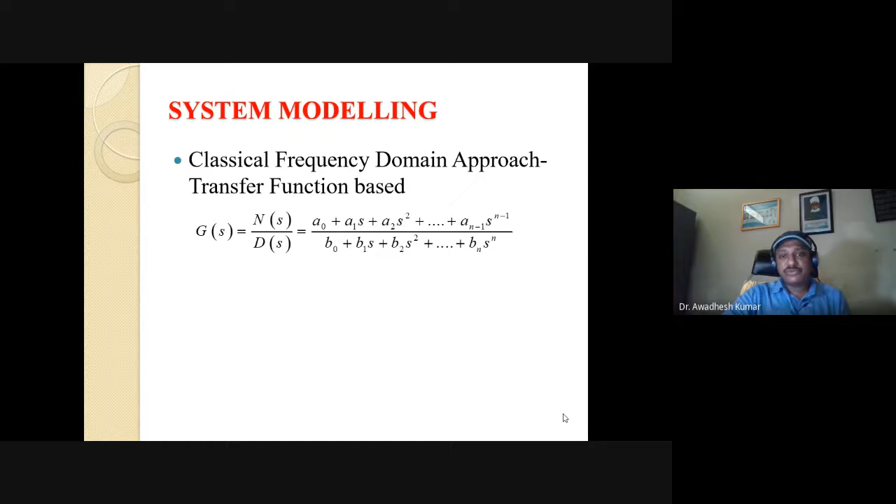So often the two representations we see: one is the classical presentation via transfer function approach, where the transfer function is nothing but the ratio of two polynomials of S. And if we define this transfer function, it is always for the relaxed system, and in S domain, this is the Laplace transform of output to input.

While in time domain, we go for the state space modeling, where what we do is, if we have an nth order differential equation with us...

So what we can do is we can break this nth order differential equation into n first order differential equations and put all those differential equations into some matrix form, leading to x dot equals Ax plus Bu, and y equals Cx plus Du. This is well known to all of you, I hope. So these four matrices A, B, C, and D now represent our system, where the first equation is called the state equation, and the second one, y of t equals Cx plus Du, is called the output equation.

So in both representations, there are some limitations and some advantages. In the transfer function approach, suppose you go for a very high order system. In the denominator, this n will be very large. Let's say if n is 100, then in the denominator you will have 101 terms, and if this figure goes beyond 100, it's difficult to even write, and the analysis becomes cumbersome in the frequency domain. While in the time domain, with matrices A, B, C, and D, this matrix A will be, in case of 100th order, a 100 by 100 matrix, and most of the elements of this matrix would be 0. So only the storage of non-zero elements is your concern, which is a convenient way to represent the high order system.

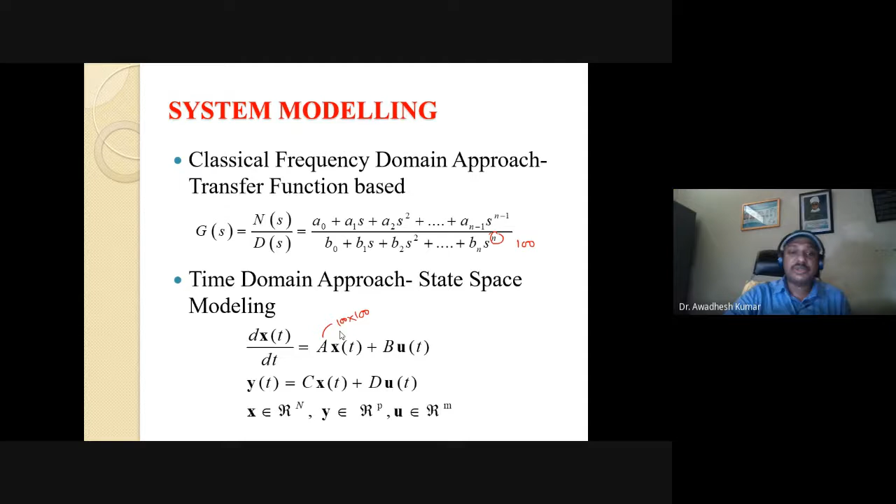And further, being represented via this time domain, mainly I have worked on this time domain. The frequency domain things are also very simple, but researchers have worked on the algorithm itself, and these cannot handle large scale systems. So it is always better, for large scale systems, to be in the time domain approach.

So now these slides will elaborate further on why we need approximation of the system, when it's represented with complexity, let's say as a high order system. With the system, what we want first is the analysis and synthesis of it. This will be difficult somewhat, and better understanding of the physical system will be difficult if you have a complex and high order system. So that forces us to go for a simplified version of the original system.

If we have the simplified version, it will have less simulation time. There will be reduced complexity, reduced hardware complexity, and it will lead to simplified controller design. This will be elaborated again in the future slides, and all this will lead to cost-effective solutions.

So now coming to the motivation. One thing, Dr. Chiranjeevi. Sir. Yeah, actually unfortunately we don't have power right now, so I'm sitting without a fan. Anyway, the internet is fine with us, and we have a backup also. Otherwise, we'll use some data if anything goes wrong. Yes sir, I will inform you. So yes sir, okay.

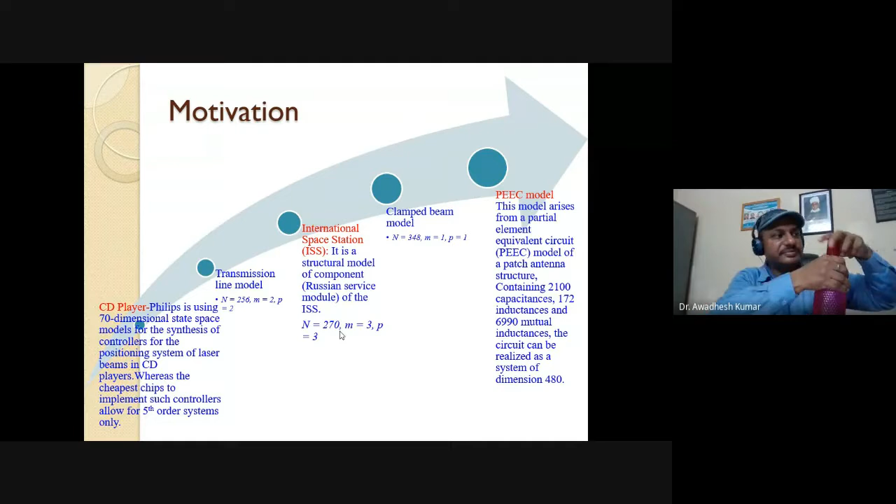Right, so now we can see several examples of the transmission line model. This happens to be of 256th order. Then the International Space Station, that is 270th order. Clamped beam model, PEEC model - this PEEC model contains around 2,100 capacitances, 172 inductances, and around 7,000 mutual inductances, so on. I hope we are familiar with the order of the system.

So once we have the energy storage elements, these give rise to the order. Suppose we have 2 inductances and 2 capacitors - if we try to model this, we'll have a 4th order system. So the number of capacitances and inductances leads to a high order system, right?

And of course, if there are several capacitances, we can put these into some equivalent capacitance, so that would simplify the order - we'll have less order with the simplification of the equivalent representation. But often in a complicated circuit, it is not possible to present the equivalent of all the capacitances and all the inductances. Otherwise, all circuits would reduce to 2nd order only, because in electrical engineering we have only 2 energy storage elements.

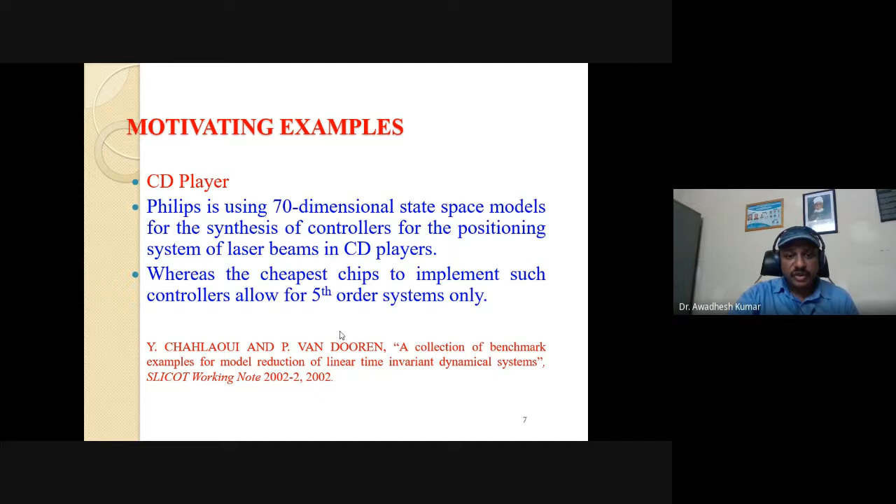So this forces us to look for some simplified version of the model. This is another Russian service module - when it is presented into the state space model, it happens to be 270th order with 3 inputs and 3 output systems. Then another one is the PEEC model.

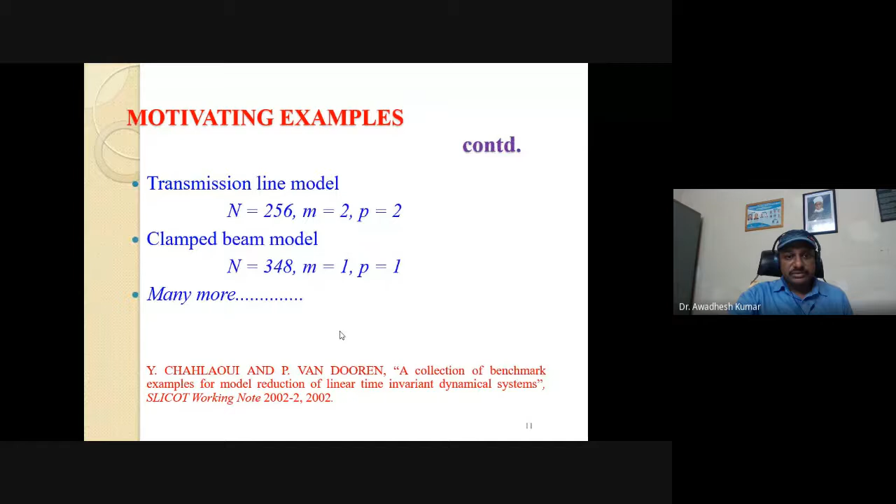Now let us define what it is. The aim of model reduction is to replace a given mathematical model of a system or process by a model that is much smaller than the original system, but still describes at least approximately certain aspects of the system or process. So we want to represent a system by its simplified representation, and that simplified representation should still possess at least the most important features of the original system.

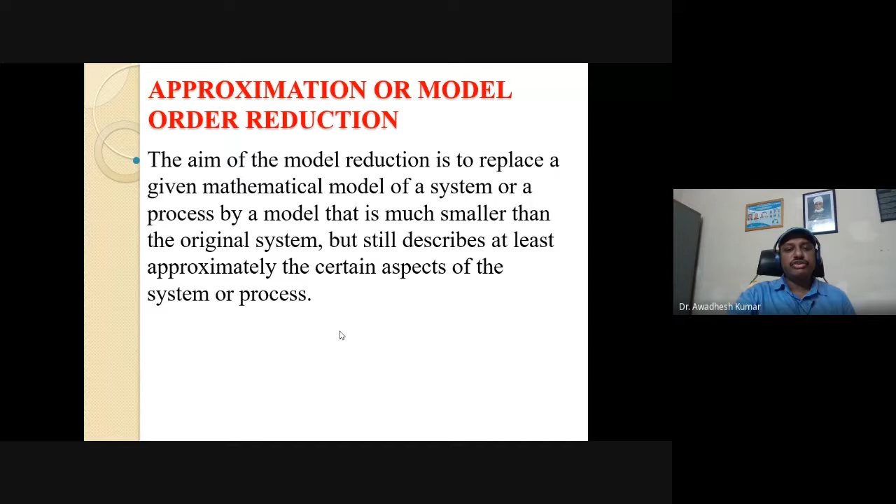Now, in order to do that, what are the constraints, what are the points that should always be taken care of? This approximation error means: the simplified version and the original system, if given the same kind of input, then the response obtained via these two - the original system and the approximation - we call that difference the error, and this error should be as small as possible. This error is measured via several other notions.

And if the original model taken is a stable one, the reduced model or approximation should also be stable, so that stability is preserved. Even if the original model is unstable, the simplified model should also be unstable. Most of the time we are concerned with the stable original system, so the stability should be preserved while presenting a simplified version of the original system.

Passivity is another notion - this should also be preserved. In some large interconnected systems, even though the original model is passive, after simplification it is able to possess some kind of energy, so the model does not remain passive. So we have to take care of passivity as well. And whatever mathematical steps we prepare for presenting the model, they should not pose a mathematical burden to the computations, right?

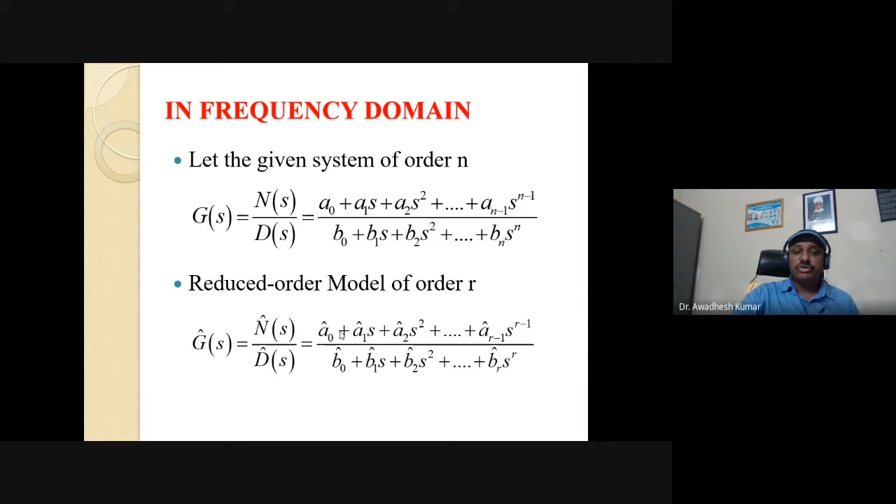Of course, we have discussed the limitation in the frequency domain. So mostly we deal with the time domain. In time domain, what we have is the presentation by some matrices A, B, and C, where N is supposed to be very, very large. So the system matrix A is of size N cross N.

If I present the system as a black box denoting with x of t, the output, input, and states all become important. Representing this by x of t, given the input u of t, it gives the output y of t. Now I'm going to present a smaller version of this system.

So we can have another system z of t, which is the simplified version of x of t. If I'm giving the same input u of t, I must expect the same output y of t from this simplified representation, but it will not always be there. If it is some y dash differing from the original, then the difference between y of t and y dash of t should be as small as possible.

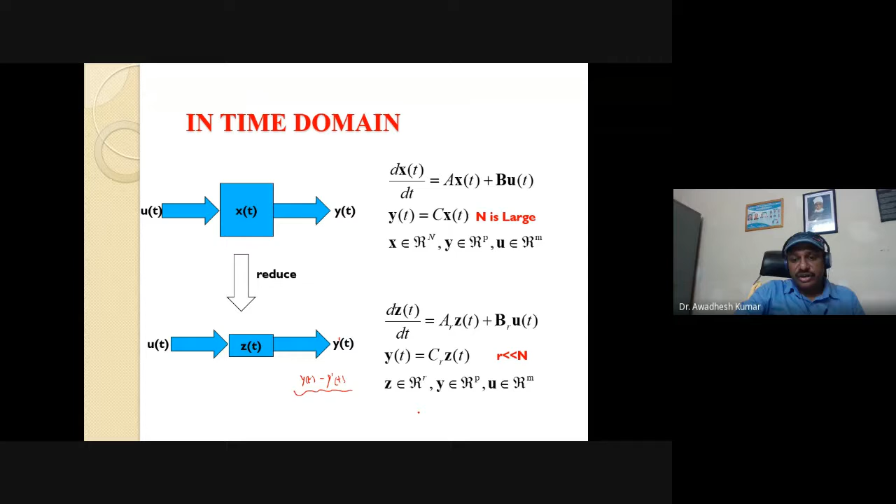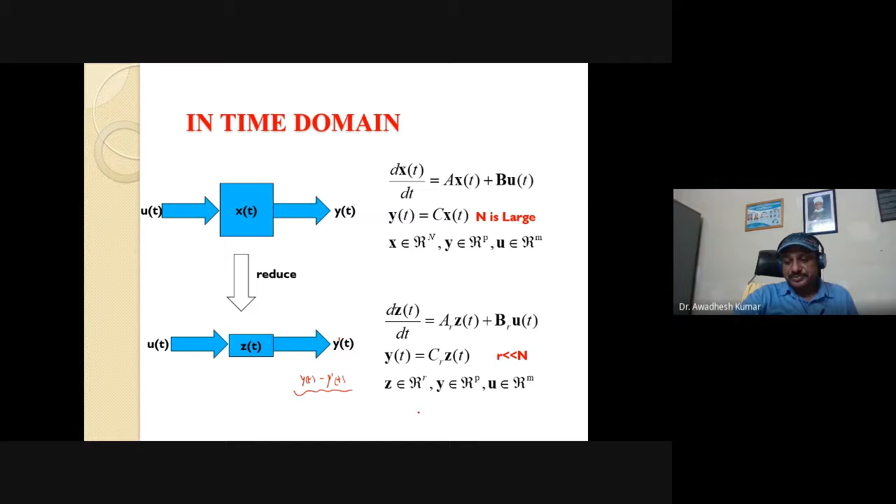So we will have another set of presentation: z dot equals Ar z plus Br u, and y of t equals Cr z. So instead of A, B, C matrices, now we have Ar, Br, and Cr, where this Ar system matrix is of order R cross R, and R is much lesser than N. So this is the statement or objective of the reduction in time domain.

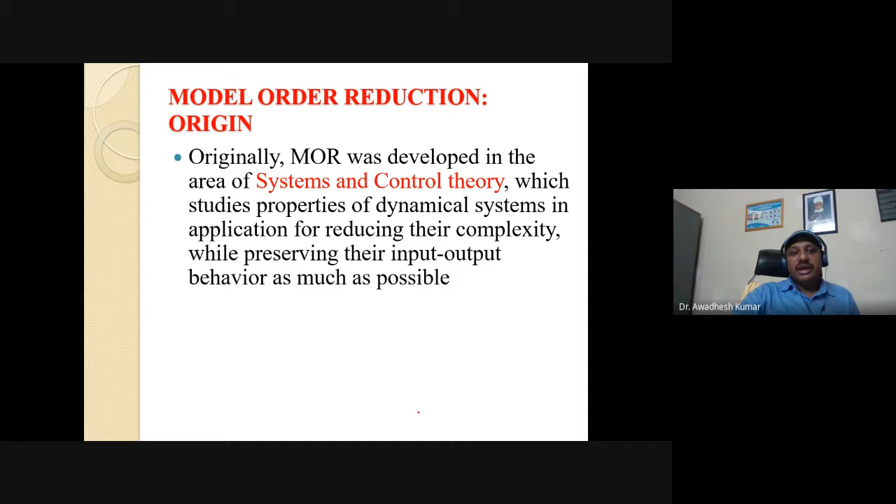So let us come to some historical notion about this area. Originally this was developed in systems and control theory, and still it is thought to be, in fact, the system and control papers are dominating, still dominating. So originally it was developed in the system and control area, but soon it was taken up by numerical mathematicians, especially after a very prominent work as the Padé via Lanczos.

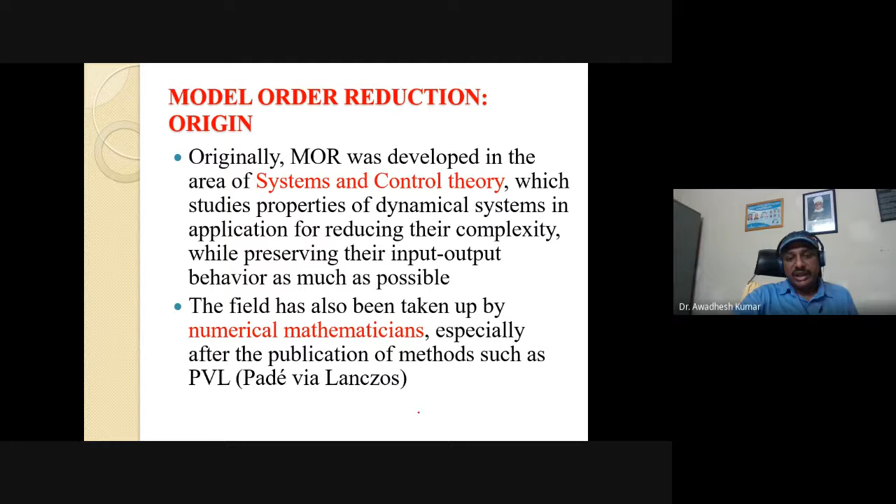And now it is, in fact, a flourishing field of research in both these areas: system and control theory, as well as numerical analysis. But most of the prominent work has been done by the system and control people.

This idea is not new, but it all started in 1807 when Fourier translated the idea to approximate a function with few trigonometric terms. We often have encountered this Fourier series and all.

In linear algebra, the first work via Lanczos was realized, where he represented a matrix in tridiagonal form. Again, W.A. Arnoldi realized that a smaller matrix could be a good approximation of the original matrix. In time domain, this is a play of matrices only.

So the fundamental methods were actually published in the 80s and 90s of the last century, and then this area started taking a boom. In '81, a very prominent work by B.C. Moore was proposed, known as balance truncation. And one more important technique came out in '84 by K. Glover, this optimal Hankel-Norm approximation.

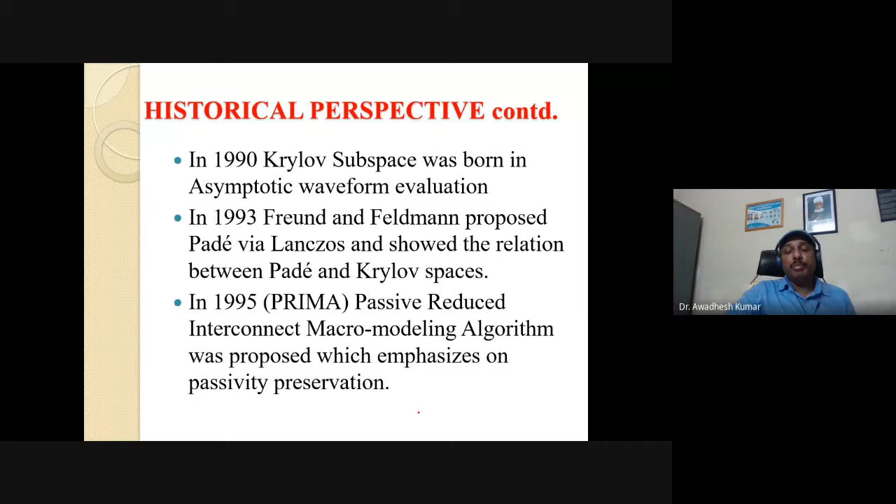So these are a few of the prominent works as a historical perspective I have taken. Still, there are many landmark things. But these, in fact, were the basic things - you can take it as the beginning of this particular area.

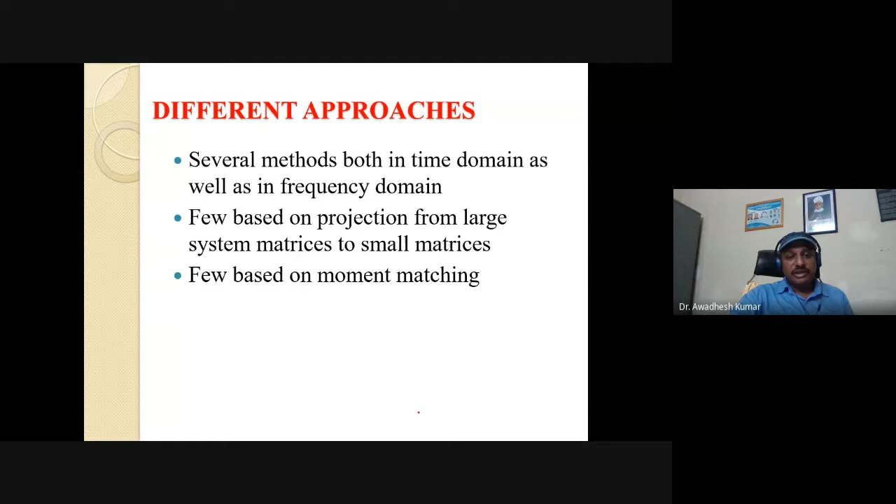Now, having seen this perspective, let us jump to the different approaches. Several methods, both in time and frequency domain, are found in literature. Some are based on projections, and some are derived through moment matching.

In time domain, the prominent methods we could see are: Krylov subspace projection, balance truncation, and Hankel-Norm approximation. I'll try to cover a little bit on Krylov, I'll more focus on balance truncation, and give you a glimpse of Hankel-Norm also, but we'll focus more on balance truncation and a little bit on Krylov subspace.

There are several frequency domain methods based on dominant pole retention, pole clustering, Pade approximation, Routh-Pade approximations, methods based on ISE minimization, applying conventional and evolutionary techniques. The basic formulation is the same, but once you apply different optimization or evolutionary techniques, this gives rise to another method. And by mixing two methods, you can propose some new method. So there are several variants to these methods.

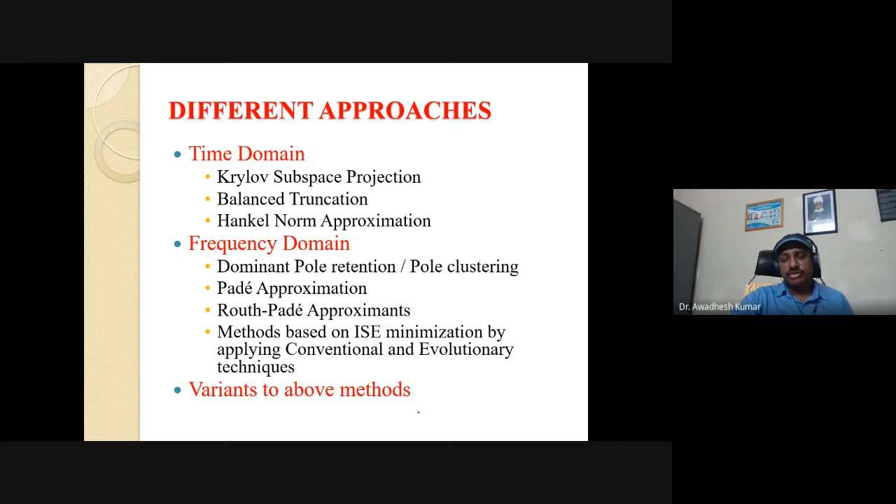We'll not discuss in detail, but if time permits, we'll discuss a little bit on the Pade approximation as the basic approach, so that we can convey the basic philosophy of this particular research area.

Now, before we enter into the approaches, let me discuss a few terminologies so that it will be easy to understand those things. The first terminology is singular value decomposition, SVD. The second is factorization of matrix, Cholesky factorization. Then the projection framework. I would like to discuss these three terminologies one by one so that we can enter our topic. So first is singular value decomposition.

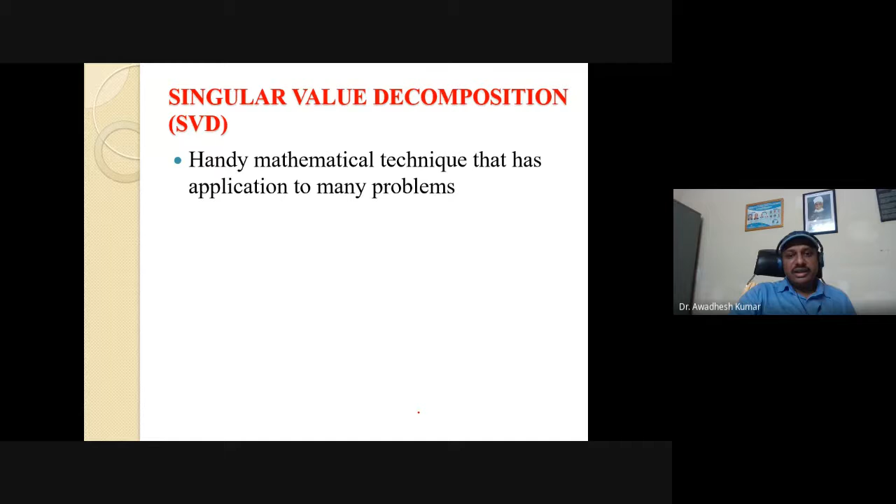It is a very handy mathematical technique that has applications to many problems.

The matrix A can be factorized into three matrices U, W, and V, such that U, W, V transpose is equal to the matrix A itself, where A is of order m cross n, U matrix we can take as m cross n, the V matrix is n cross n, and the middle one, the W matrix, is the most important, of order n cross n, and it is a diagonal matrix as well.

The most important feature of this matrix is that it has only the diagonal elements as some positive values that we call singular values. Let us represent this via W1, W2, up to Wn. So if it is an nth order system, we'll have n Ws, and via MATLAB you can easily calculate this SVD using the command [U,W,V] = svd of system matrix A.

If you define this W, we call it the Hankel singular values. They are just the square root of the product of controllability and observability gramians. What are the gramians? We'll see later on. One more thing, we can relate these singular values as the square root of eigenvalues, and eigenvalues again are nothing but the most important characteristic feature of the system.

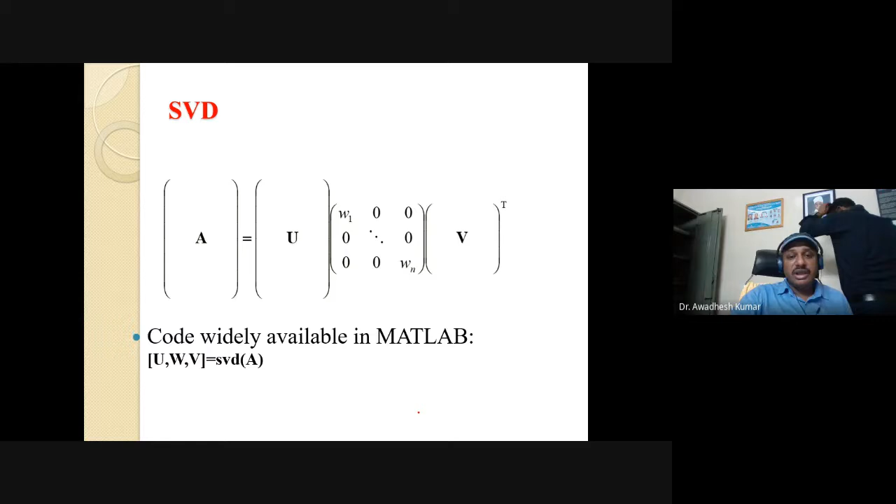So in order to have the algorithmic development of these processes, we often need to use this singular value decomposition, where the matrix A is factored into three matrices U, W, and V.

One more thing, we can find out the rank of the matrix by observing the number of non-zero Hankel singular values. What happens in the system when we calculate these singular values, we may observe some of these Wi may be 0, and that is because the system matrix A is not a full order matrix. So then it will be 0.

So corresponding to those zero singular values, those states can just be left, those can be truncated directly without harming the system, and the system order will automatically be decreased to some lower order.

Let's say if the rank of A is less than capital N, and it is some K value, so the order will be K. But still, we are interested to lower the dimension of that matrix to somewhat lower value, let's say R, with R being much lesser than K also. So what we do is we try to sort out those singular values which are important to us, and how they are important, the coming slide will discuss.

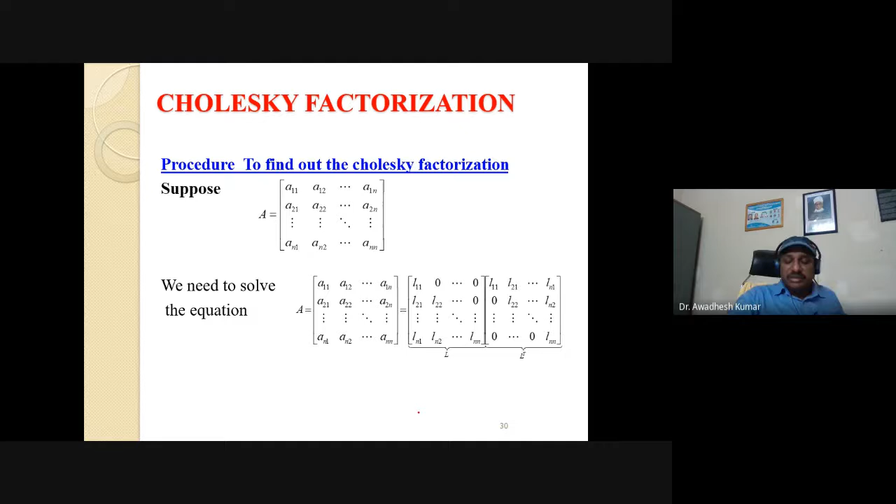So just applying the principle of equation, you can solve this. Here is some general formula or equation given to you, by which we can find the elements of the L matrix.

So this just gives you how we go for this Cholesky factorization. Once you obtain this L matrix, these are the things that you are going to use in your algorithm.

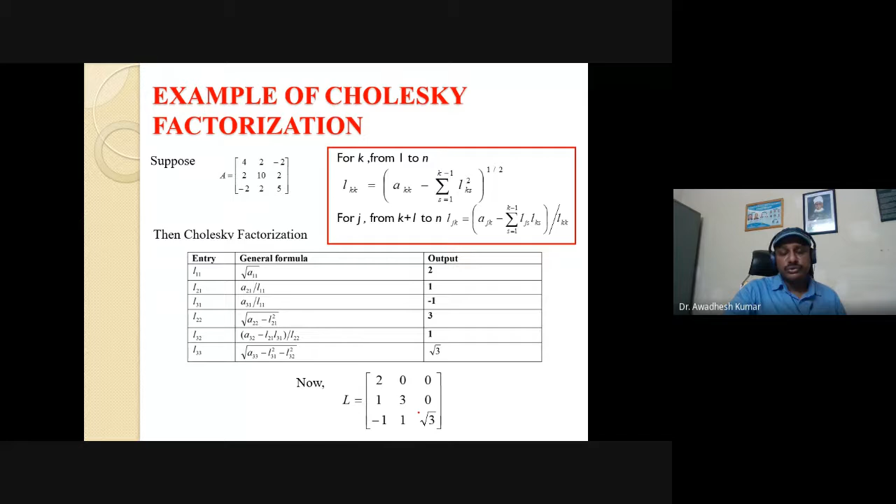The next important feature of this is your projection framework. There are a number of concepts that should be discussed, but these three are in fact sufficient to proceed with our topic. So this third approach is the projection framework.

How this works: our objective is to represent a system of n states as a system of r states. So we can have a projection matrix that we may call UR. The states are represented with a column vector, which is n cross 1, and the reduced system will be having R states, so this is R cross 1 column vector. This is the state vector of the original system, and this is the state vector of the reduced system.

And this we can relate via some projection matrix, let's say it be UR. UR is some matrix, of order n cross R. So this is the matrix via which we can reach from n states to R states. Let us see how.

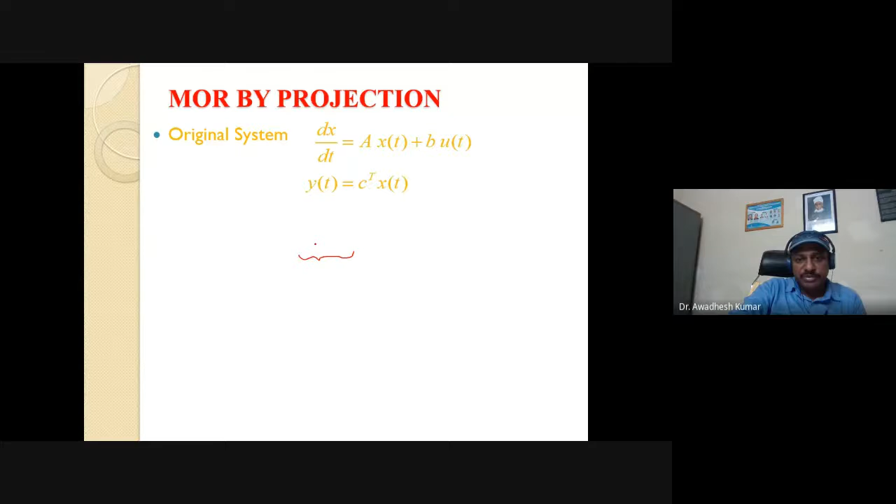Now just substitute this x, the original state, as UR times x cap, where x cap has R states, while x was having n states. So we can just replace it, following the matrix multiplication rule: if UR is n cross R and x cap is R cross 1, the resultant is n cross 1, so the matrix multiplication rule is satisfied.

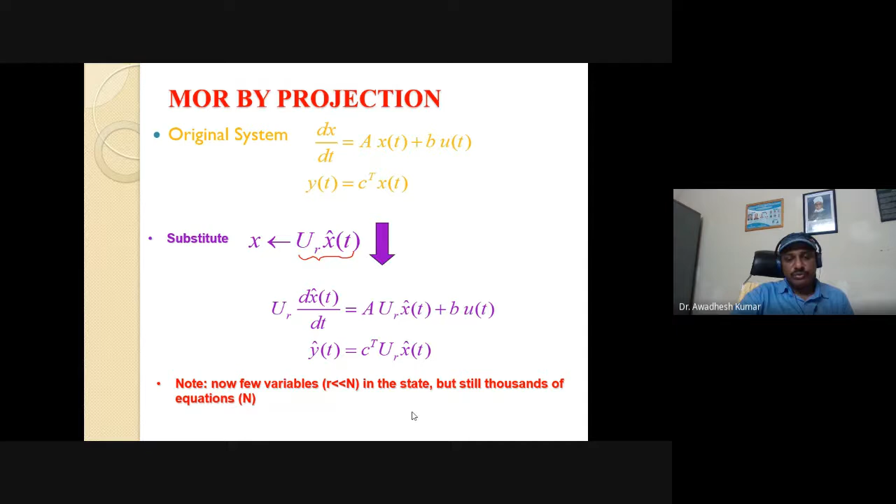So here you can replace x, the original state, with the reduced state through the projection matrix UR. Substituting this in the original system, you'll have UR x cap dot equals A UR x cap plus Bu, and the second equation becomes y(t) equals C transpose UR x cap. Now, R is very, very less than N, and that is my objective—we want a much simpler representation of the original system.

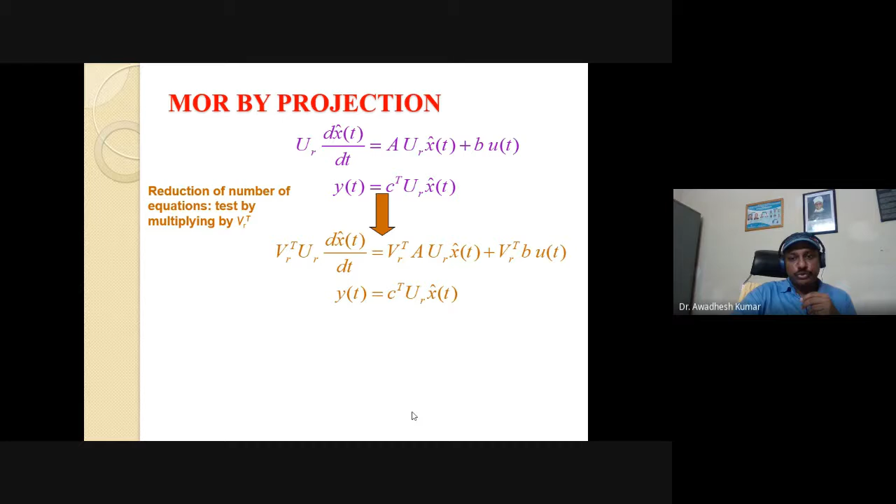So let us pick another matrix VR transpose, and multiply it with the transformed state equations, the transformed state space model. We'll have VR transpose UR x cap dot equals VR transpose A UR x cap plus VR transpose Bu, and y will be the same as C transpose UR x cap.

Now let us choose VR transpose UR such that it equals the identity matrix, which happens when they are bi-orthogonal matrices. This choice we can always make. So we pick these matrices such that UR transfers the n states to R states, and VR transpose is such that the product of these leads to the identity matrix.

In this way, what we'll have is the representation: dx cap(t)/dt equals A cap x cap(t) plus B cap u(t), and y(t) equals C transpose cap x cap(t). So from x we have replaced the system with x cap. Is everything fine?

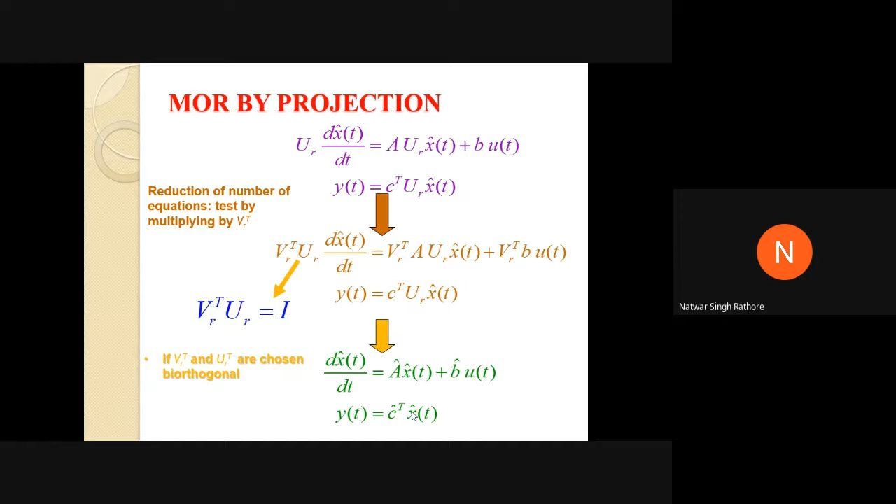Yes, sir. Okay, because I cannot see, I make it full screen, I cannot see the... Yes, sir. Everything is okay, sir. Some noise is coming from some side.

Now it's okay. So we have the transformed states now in this form. See here, xt has been replaced with x cap of t. So this x cap of t is having R states. So the system has been transformed into the R states only. And here, instead of A, B, and C matrix, we now have A cap, B cap, and C cap. One more important thing about the notation: if we represent this with a small case b, then it is a SISO system. Otherwise, if it is capital case, it is a MIMO case. In both cases, this is equally applicable. So now we have A cap, B cap, and C cap. Starting from the original system with matrices A, B, and C, now we have A cap, B cap, and C cap, and the dimension of A cap is now R cross R.

So this is the philosophy of projection by which we are going to reduce the number of states, and so the order of the system.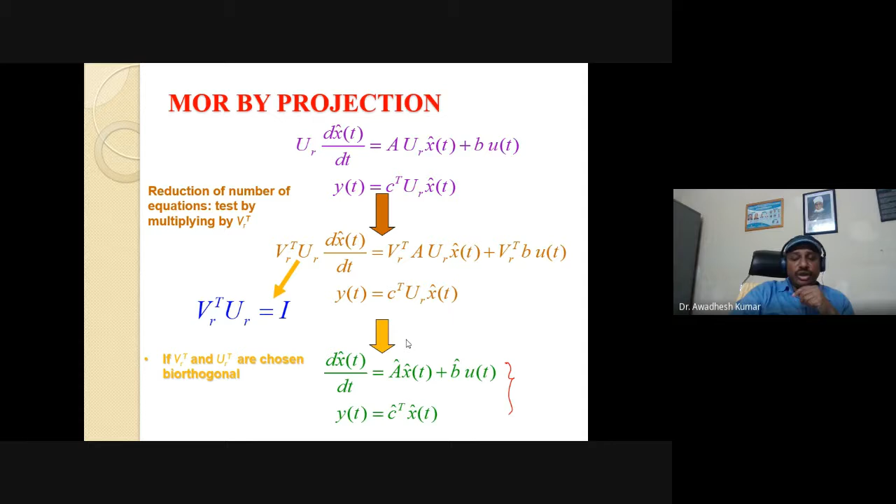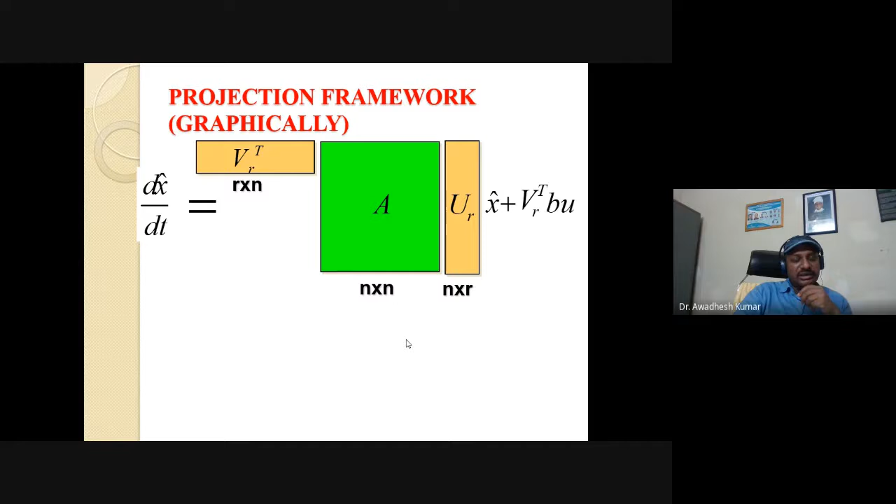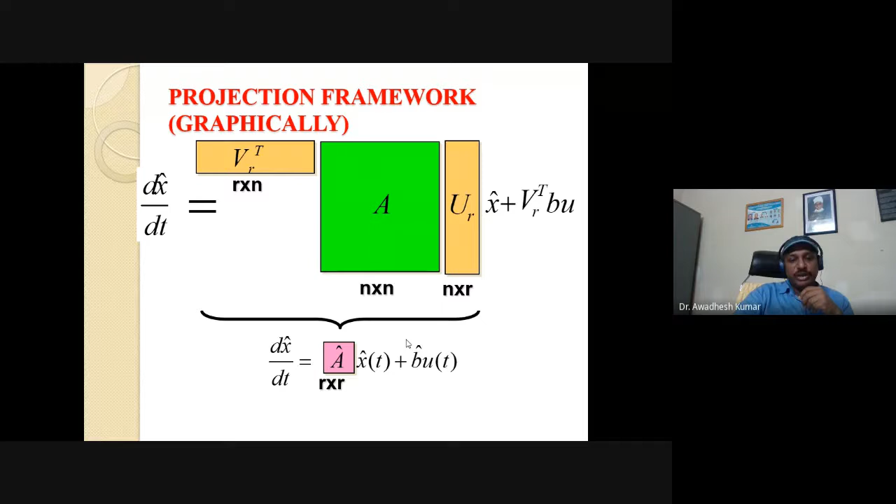You can again look at this in some pictorial form. The original system is x dot equals Ax plus Bu, where A is n cross n. Now instead of x, u, we use x cap, U r x cap. We have transformed the system, and we have chosen a V transpose matrix of R cross N. So the coefficient of x dot cap is now identity, and you can take this as x cap dot only. So now in place of the A matrix, what you see is V transpose A U R, and this you can replace via A cap. So this was the projection framework we tried to understand.

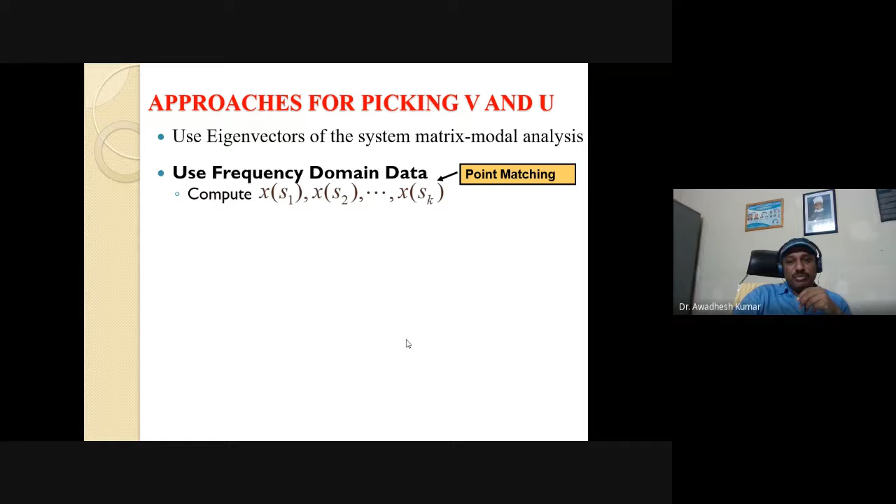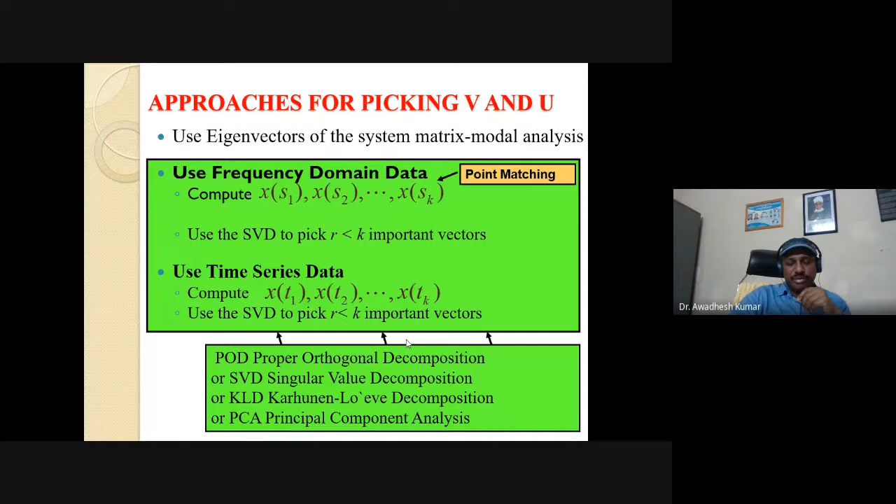So now we are in a position to proceed further. We understood SVD, we understood Cholesky factorization, and we also understood the projection framework. Now you must be wondering about these two matrices V and U, and picking up U and V is again an area of research - how to choose them so that you can successfully achieve your objective of presenting the original as a reduced system. There are several ways to do it. I will not go into detail, but I'll list out some ways: we can use eigenvectors of the system matrix, modal analysis, we can use frequency domain data, this is called point matching, and we can use time series data. So there are several methods for choosing these U and V matrices. If we classify this whole model order reduction in a new way, it is nothing but moment matching and the projection framework. Each method has its own way of projection framework and picking up these U and V matrices, and the way they are picked up gives another name to that method.

These slides will give you just a glimpse of the several ways of picking V and U matrices. In the Krylov subspace vector method, there is one important thing called implicit moment matching. Here we try to pick up these two matrices through some steps, some algorithm - this is done via the Arnoldi algorithm and the Lanczos algorithm. Within the algorithm itself, it will carry out and find the reduced order model, and you can check that the reduced order model will have the same moments as the original system. So the algorithm itself takes care of the moment matching.

One of the methods, very popular in the frequency domain and I believe the oldest method, is the Pade approximation. In Pade approximation, you try to calculate the moments of the system - there are two moments, the time moments and Markov parameters. You try to calculate the moments of your reduced order system, which will be some function of the coefficients of its numerator and denominator polynomial. You try to match these two moments, the time moments and Markov parameters, and this is how you obtain the numerator and denominator coefficients of the reduced order system.

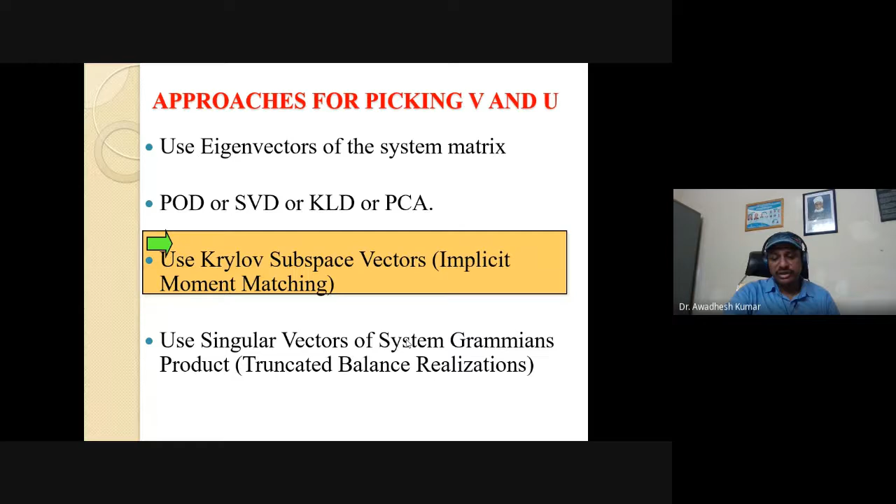So let us proceed with Krylov. I have already introduced a little bit, so let us see just a few more things. I'll not go again with much detail, so you may find difficulty if you're not in this area, but still you will be able to understand at least the philosophy of this process.

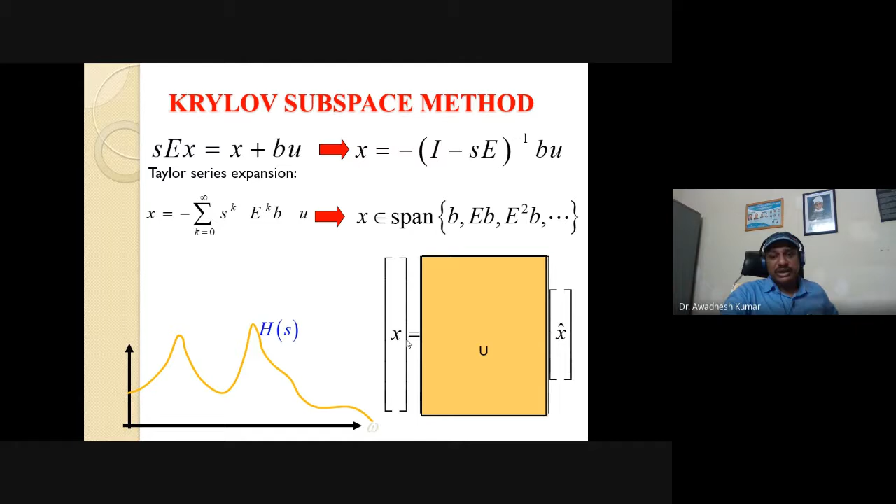So in the Krylov subspace method, what we do is present some span, some vector spaces, and with these bases we use the projection framework. For these frameworks, algorithms have been proposed, especially via Arnoldi and Lanczos. Most people use those bases, though there are variations to it - a number of variations have been presented. But the basic philosophy has been taken the same by all researchers.

In fact, these bases have been picked up in such a way that the moments are matched - the objective is the matching of the moments. When we expand a transfer function, which can be represented via A, B, C, D matrices, the relation is G of S, the transfer function, is equal to C times (SI minus A) inverse into B, plus some D. This transfer function can be expanded into a series - we call this a Taylor series around some frequency point, let's say S equal to 0. When we expand around S equal to 0, the coefficients are called the time moments - this will be a series whose coefficients are the time moments. When this series is expanded around S equal to infinity, the coefficients are called the Markov parameters. So we always take care of matching these time moments and Markov parameters, and this way we try to project our framework.

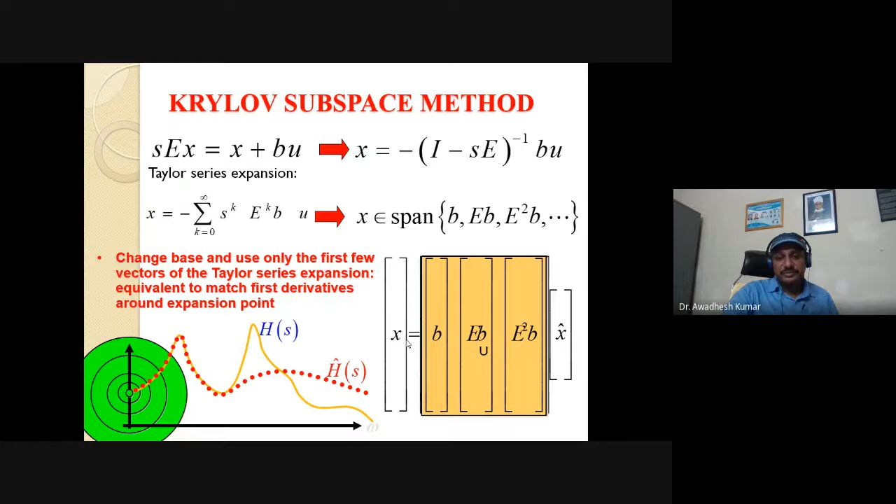So this is the way we take the vector space, the span of B, AB, and so on. Instead of E here, I can take the system matrix A. This is some other notation where the system is represented in descriptor form, where we represent this as E x dot equals A x plus B u, and y equals C x. So here, instead of E, I can replace this with capital A if the original system is represented via matrices A, B, C, D.

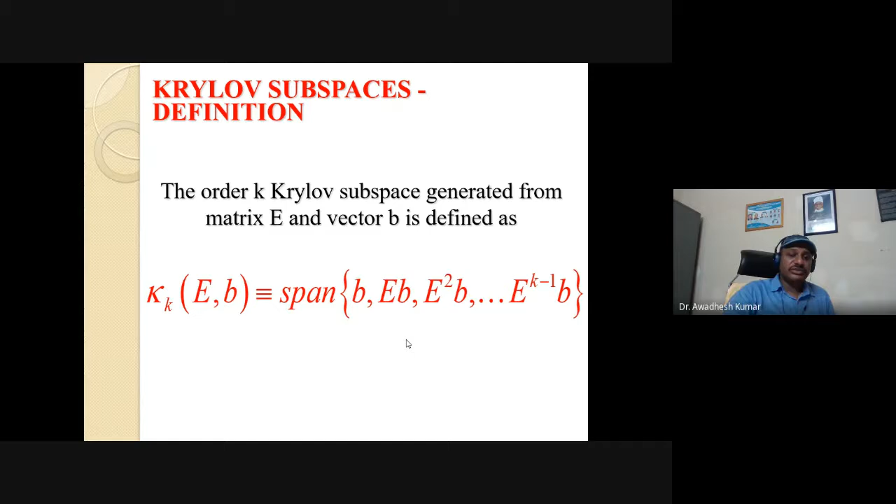So we can take this S equal to 0 for expanding this function, and also we can take instead of 0 some other points S1, S2. So these are again multi-point expansions of the same series.

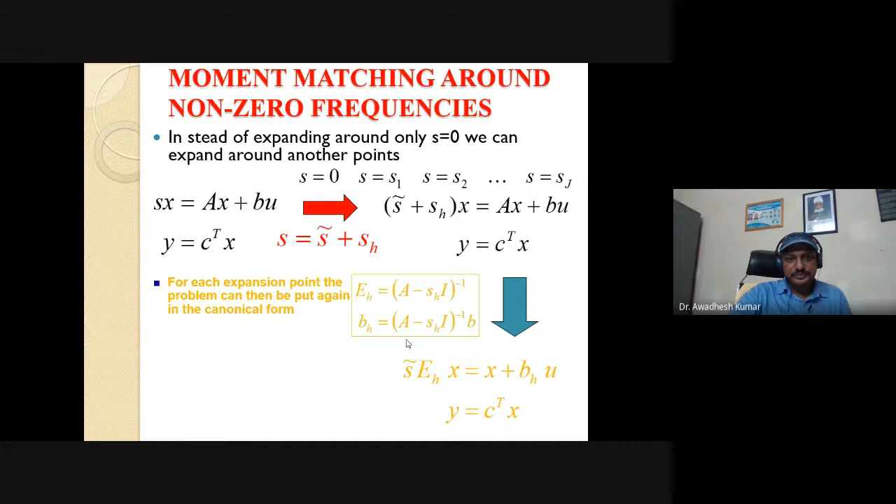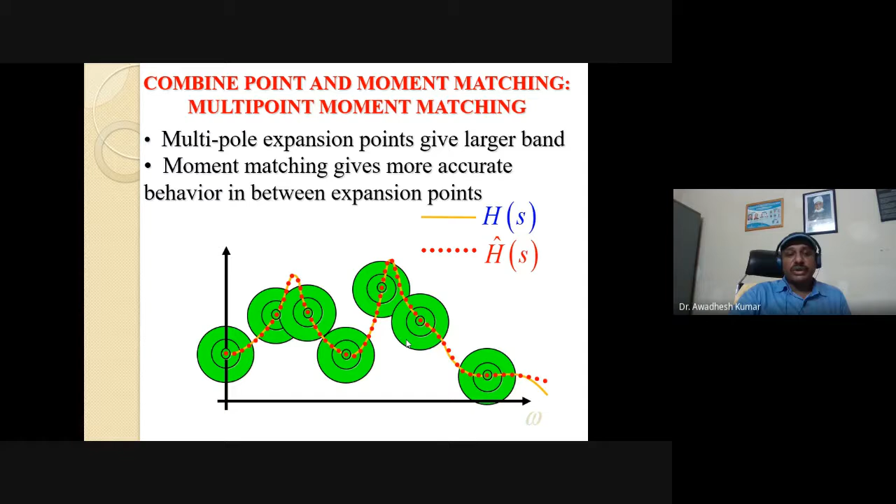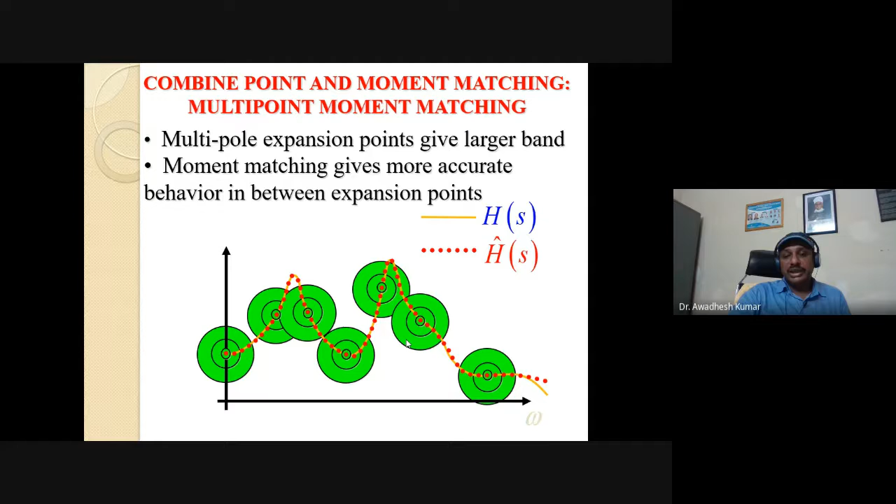Now let us skip to this slide, where these moments can be matched. Multiple expansion points give a larger band, and the moment matching gives more accurate behavior in between expansion points. So not only S equal to 0 or S equal to infinity, if you take more points at which expansion could be done and matching achieved, this would lead to better approximation, right?

Next, I've already given some discussion on the slide about how to compare this Padé approximation and Krylov subspace projection framework. In Padé, what we do is explicit moment matching, so we need to calculate this moment and then try to match and obtain the reduced order model.

So here it becomes somewhat numerically ill conditioned. When we say ill conditioned or well conditioned, it means that if it is ill conditioned, these steps are such that if you perturb it a little bit, the output is much more sensitive, or the reduced order model may not be a good approximation. That's what we mean by ill conditioned.

So every time our algorithm or steps should be well conditioned. Well conditioned means they are insensitive to little perturbations, right? So in that sense, Krylov happens to be better. In Krylov subspace projections, this is multi-point moment matching, and this is numerically stable. Well conditioned is another word we can give as numerically stable.

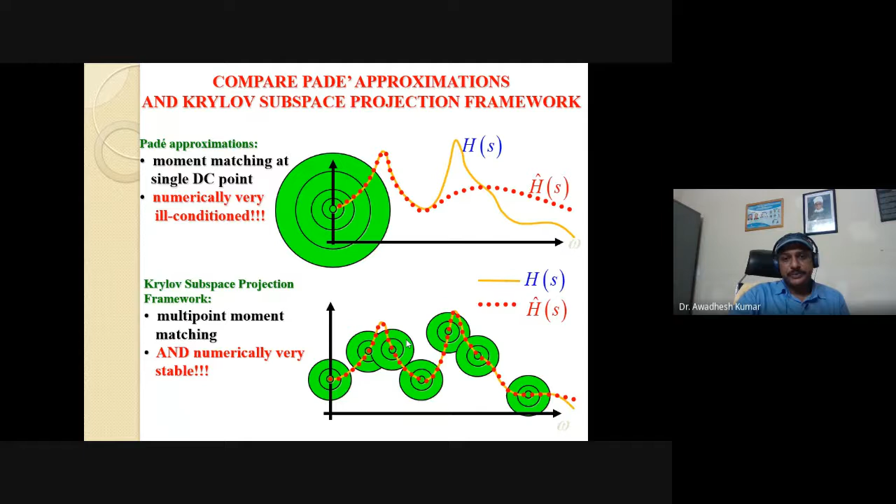Now coming to the next method, the time domain balanced truncation method. For this we'll pay a little bit more attention.

We have taken the original system with A, B, C, D matrices, presented as X dot equal to AX plus BU, and Y equal to CX plus DU. Let's say for simplicity, the output equation is just Y equal to C of X.

So there could be a transformation we call the balancing transformation, X equal to Tx bar. This T is nothing but a matrix, and you can take it as a projection framework. Let's say this T exists such that the n-state X is related to X bar, which has R states.

Now we can replace X with T times x bar, and again multiply with T inverse. So the original set of state and output equations will become x bar dot equal to A bar x bar plus B bar u, and y equal to C bar x bar, where A bar is T inverse AT, B bar is T inverse of B, and C bar is CT.

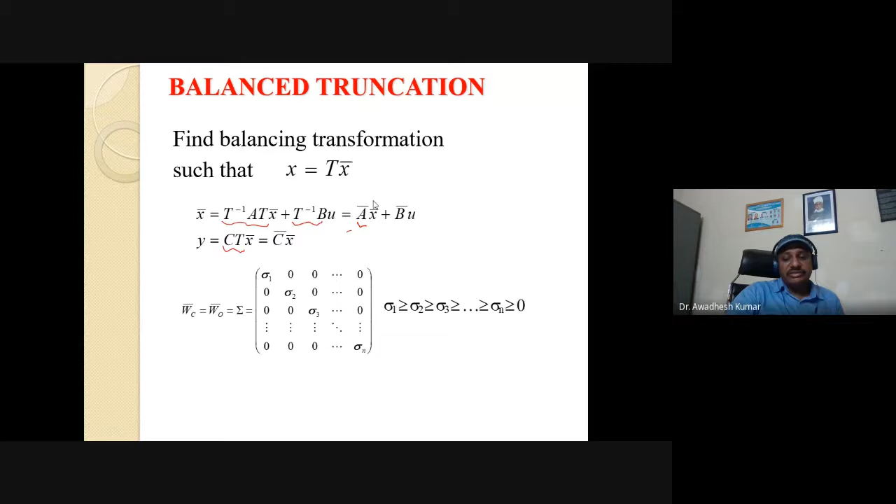Now what is the advantage of this? Let us see. We are calling this T the balancing transformation. To see the advantage of this matrix T, this projection framework, let us quickly review one notion in control theory called observability Gramian and controllability Gramian.

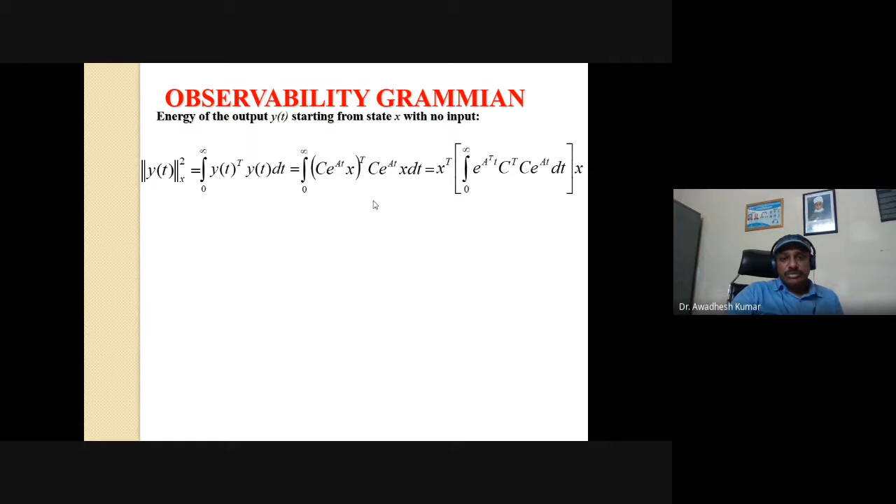Observability Gramian can be represented via this equation: the integral from 0 to infinity of e raised to the power A transpose t, C transpose C, e to the power At, dt. This particular integration we call the observability Gramian, right?

So what is the significance? Let us denote this by W naught. Of course, evaluating this integration to find the observability Gramian would be difficult. So instead, we can solve this Lyapunov equation: A transpose W naught plus W naught A equal to minus C transpose C. Both give the same result—evaluating via the integration or obtaining it via this Lyapunov equation leads to the same thing.

So in practice, we often go via this approach, calculating W naught via this Lyapunov equation.

So see here, the X transpose and the X are the eigenvectors. They are the left and right eigenvectors. So eigenvectors of this W naught corresponding to small eigenvalues do not produce much energy at the output, right?

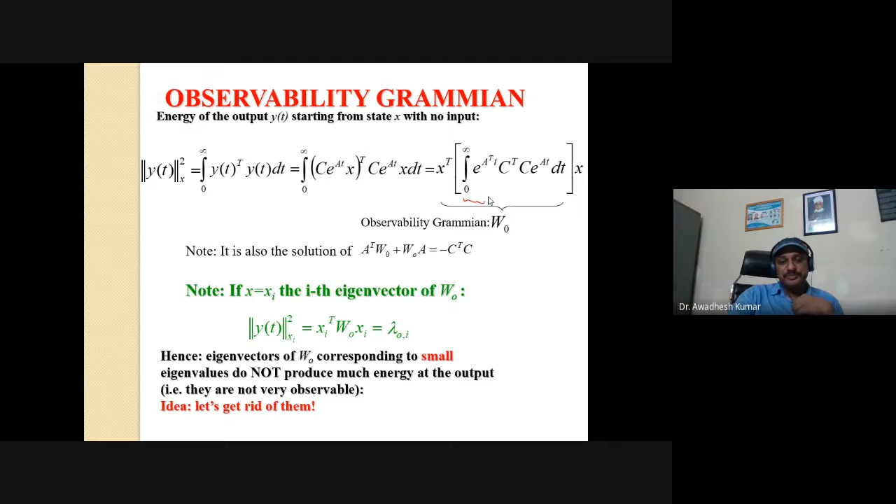Here again, we can have the controllability Gramian, something like integration 0 to infinity of e raised to the power At, BB transpose, e to the power A transpose t, dt. And again, there are left and right eigenvectors.

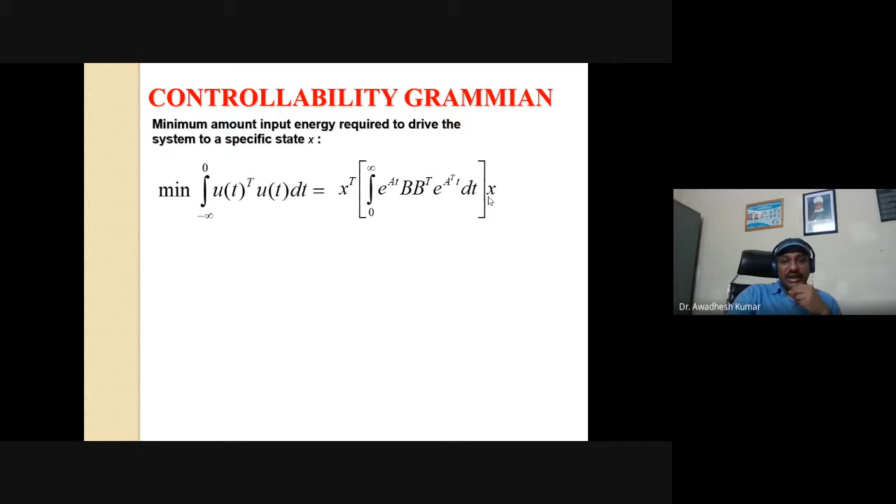So now, instead of evaluating by integration, we obtain this controllability Gramian, which we represent by WC, via the Lyapunov equation: A WC plus WC A transpose equal to minus BB transpose. And again here, these eigenvectors of WC corresponding to small eigenvalues require a lot of input energy in order to be reached, or they are not very controllable.

So they require a lot of energy, or they are not very controllable, meaning there are states which are not controllable. In other words, we cannot have an appropriate control vector u for those states, such that the initial state of the system at t equal to 0 could be driven to some other state at time t. If it is not possible to transfer the initial state to some other state at some time t in a finite time via some control vector u, then you call that particular state uncontrollable.

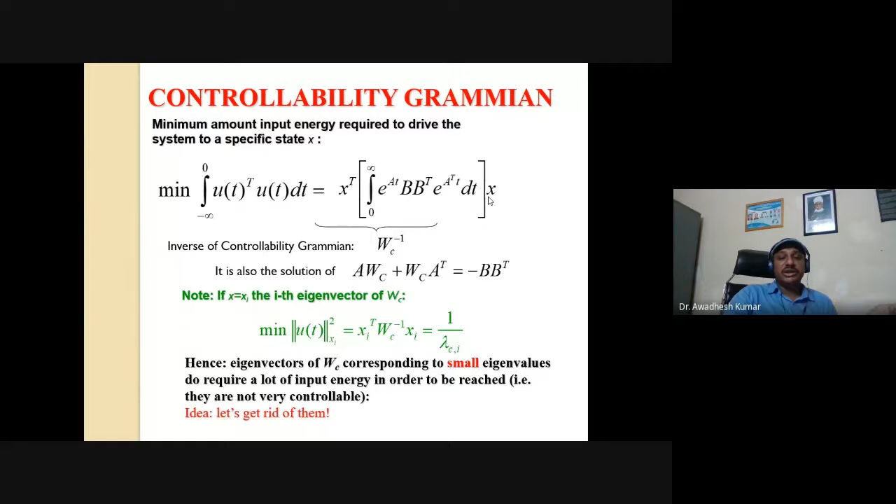In other words, these are the states which are not participating in the energy transfer from input to output. So these are not very important states of the system, even though they have been considered in the original system. So let us get rid of those states. This is how we are going to have a lesser number of states in our reduced system representation. So that is what we have understood.

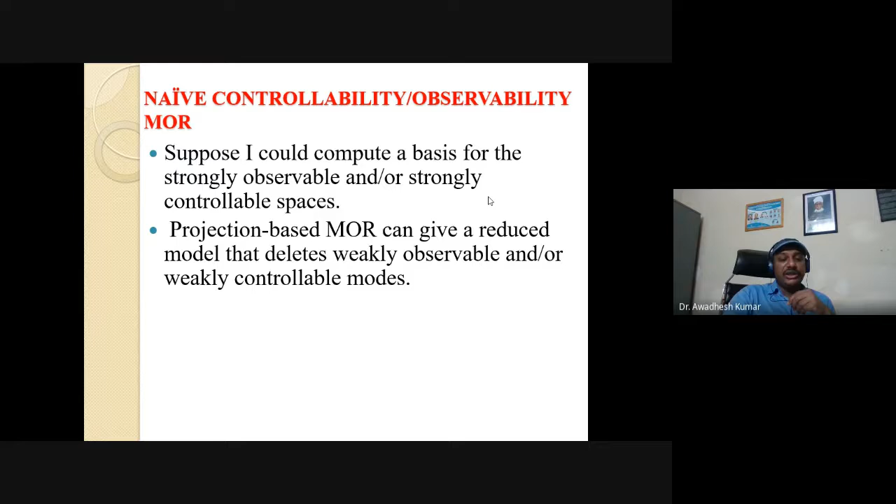Suppose I could compute a basis for strongly observable or strongly controllable spaces. The projection-based model reduction can give a reduced model that deletes weakly observable or weakly controllable modes. So here there are two things.

One is there could be some states which are not controllable, which are not observable. So straight away we can discard those states and get the system that we call the minimal realization. Minimal realization of the system, let me make you understand this in another way also.

So minimal realization of a system means, let's say I always use the original system order as capital N, and in between I'm using another order K, and then the final reduced order as R. So N, K, and R. The original system is of order N, and I am having a system of order K where N minus K states have been discarded straight away, and those states are either not controllable or not observable. Meaning they are not participating in the energy transfer from input to output at all. So those states can be straight away discarded.

And this you can understand something like this. If there are some, let's say a system has some eigenvalues. Eigenvalues is a concept generally presented via these matrices, the state space model, the eigenvalues. And in what we call the transfer function domain, we have a notion called poles, right?

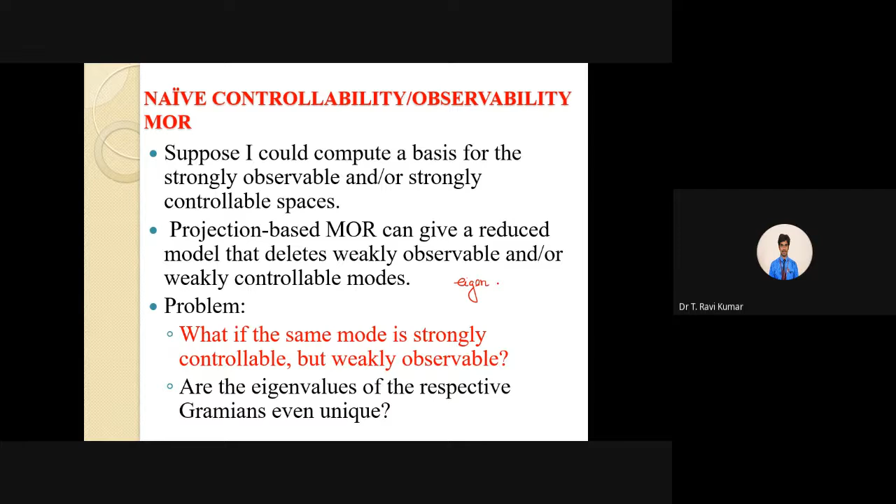Right, this is all okay. But the difference between eigenvalues and poles, whether they are same or they are different, and if they are different, how they are different?

Eigenvalues we evaluate by the characteristic equation, SI minus A is equal to 0. So eigenvalues of a system in state space we often evaluate, and that we call the eigenvalue of the system. In fact, the eigenvalues are the superset, and the poles are the subset of the eigenvalues. The notion of poles we often see via the transfer function approach, where we solve the denominator polynomial and find out the poles. So there may be a system where all the poles are contained in the eigenvalues. All the poles are eigenvalues, but there may be few eigenvalues which may not appear in the poles.

Let me just explain it. I can give you some example also, but let us go in this way. Suppose you have a system for which you have obtained the eigenvalues, and let us assume that the eigenvalues are -1, -2, and -3. These are the three eigenvalues of the system. But in that particular system, let us suppose there is a zero also, at S equal to -2.

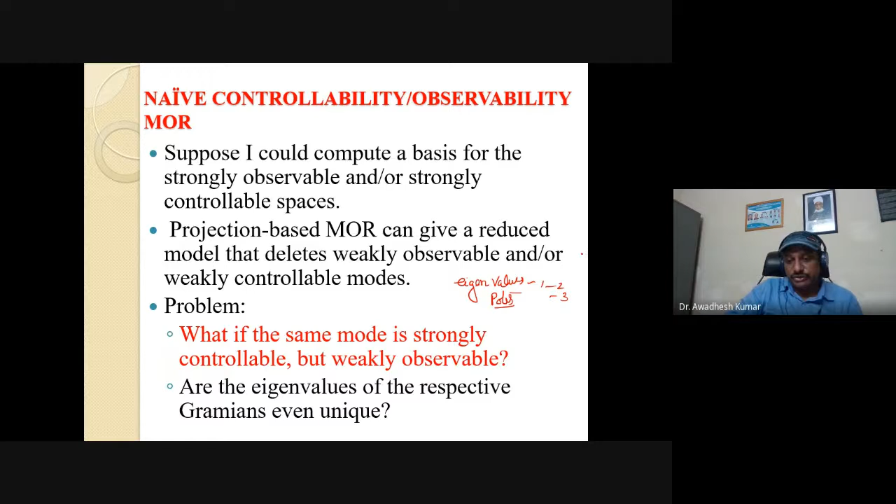So what will happen if you represent the same system in the transfer function? There would be a pole-zero cancellation, and the pole appearing at -2 will be cancelled by the zero appearing at the same place, -2. So there is a pole-zero cancellation in this particular system. So here you have the eigenvalues as -1, -2, -3, but the poles will be only -1 and -3. This -2, which is an eigenvalue of the system, will not appear in the transfer function because of the pole-zero cancellation. So you can think of these poles as a subset of eigenvalues, right?

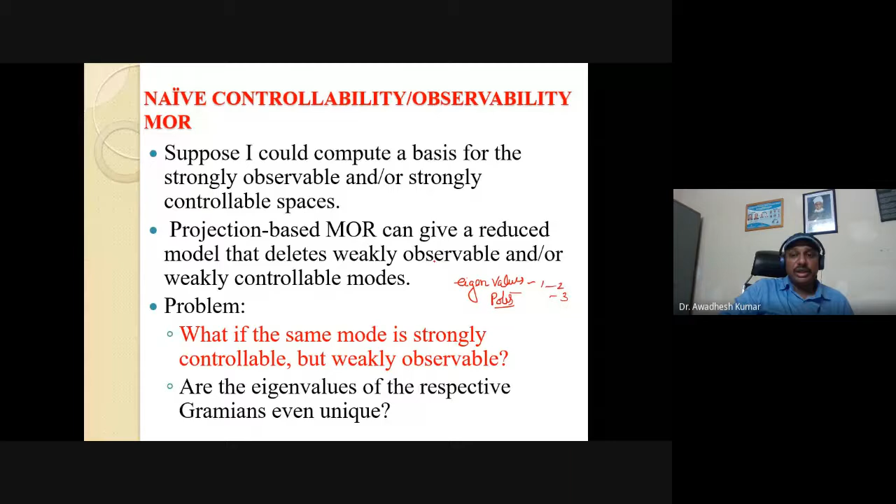So what happens is, these eigenvalues correspond to the states which are not controllable and not observable. So just get rid of these states and you will have a reduced lower order representation of the system, which you call the minimal realization of the system. So in minimal realization of the system, there is no pole-zero cancellation, and the system has the eigenvalues and poles as identical, right?

And all these states are at least controllable and observable, but they may not be equally controllable and observable, they are just at least controllable and observable. So that we call the minimal realization. From the minimal realization of the system, we move to something called balancing, which has some other, stronger notion. Let us see, we'll move to that.

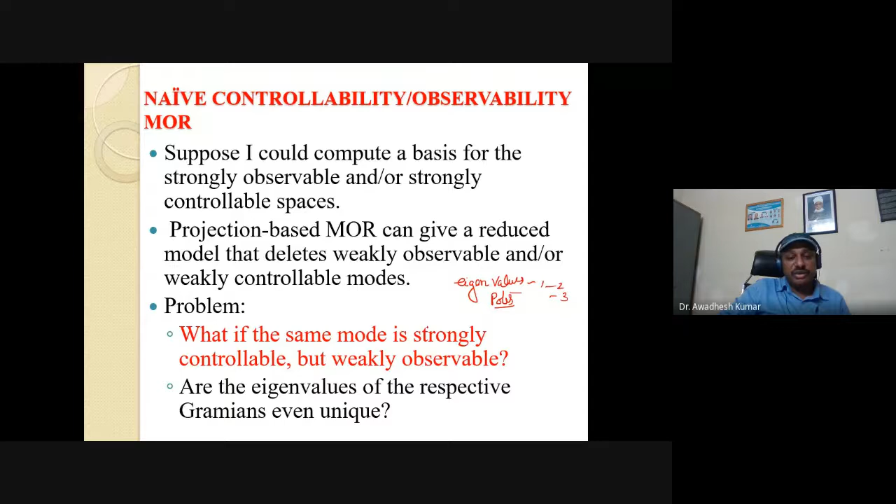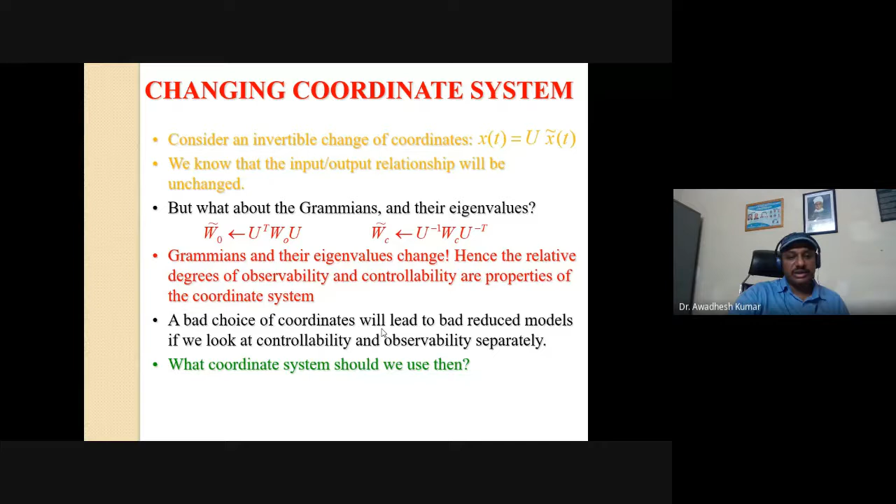So we have now come to a system of states where all the states are at least controllable and observable. But what if the same mode is strongly controllable but weakly observable, or the reverse of that? Then we do something called the balancing of the system. Balancing of the system means we try to equalize the states, that there could be a transformation existing which will equalize all the states with respect to its controllability and observability, meaning all the states will be equally controllable and equally observable. So that we call the balancing. Let us move to that very quickly.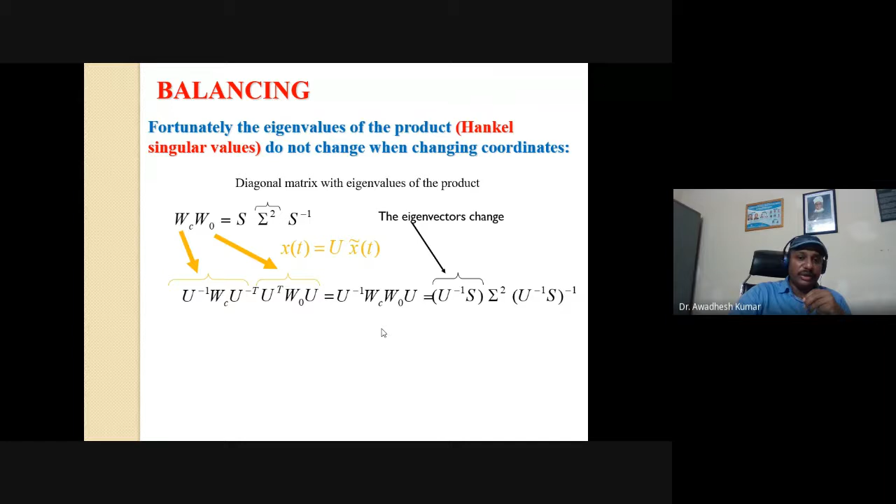So balancing. In balancing, we make a change of coordinates such that all these states are now equally controllable and equally observable. This is some mathematics that we can do for balancing. So let us move to that.

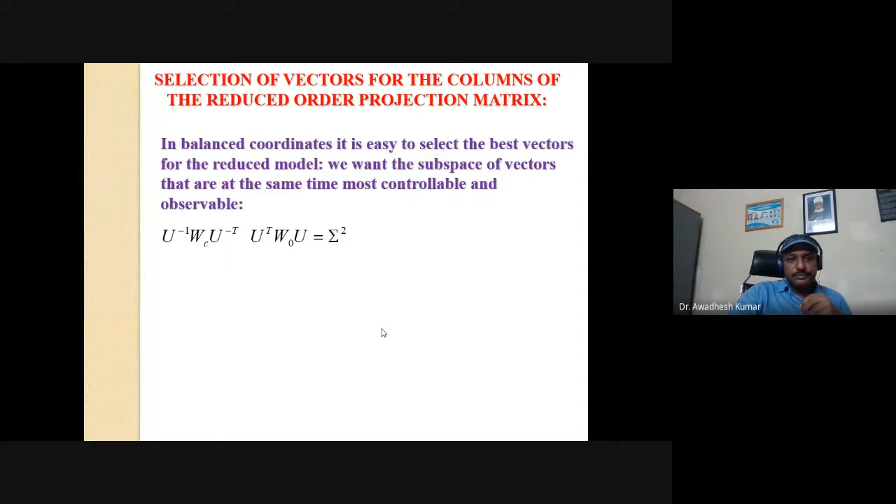In balanced coordinates, it will be easy to select the best vectors for the reduced model, so that the states selected will be strongly controllable and strongly observable. Again, we'll classify the states. Earlier, we discarded a few states which were not controllable or not observable.

Now we have the system of order K. We observe the states and classify them into two domains: one class contains all the strongly observable and controllable states, and the other is weakly controllable and weakly observable. The states which are weakly controllable and observable, if we get rid of those states, we'll have further reduction in the dimension of the system, and this is how we achieve the reduced order system via balancing. So first is balancing, where we balance it, and then truncating those states which are weakly controllable and observable. This method is known as balanced truncation.

So how to do that? In fact, this is done via Hankel singular values. What is Hankel singular values? Let me see whether I have the algorithm for it. Anyway, what we do is, for the system matrix, we try to have a Cholesky factorization in terms of LC and L naught.

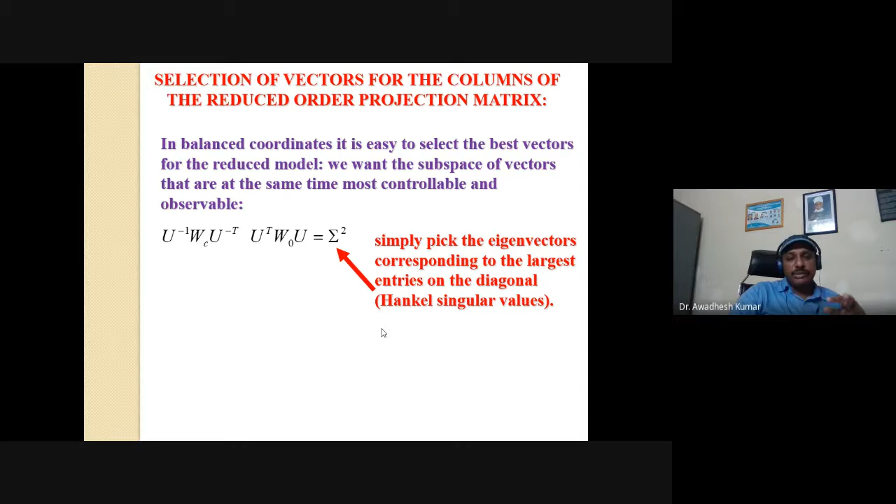So what should be the value of R? This is given by observing the Hankel singular values of the system. There is a paper where, if you observe the Hankel singular values for different systems, after a certain value, these Hankel singular values decay very fast. So you observe two consecutive singular values, let's say sigma R and sigma R plus 1...

and this ratio is, let's say, 1 to 10 -- meaning this next value is 10 times lesser than the first value. That means the weight of the next state is 1/10 of the previous state. So that particular R you can take as the order of the reduction.

Now, there are good things with this balanced realization. Mathematically, you can obtain the error. The error between the original system, represented by H of j omega, and the reduced system HR of j omega -- if you calculate the infinity norm of that, this is one way to present the approximation error. This will always be less than or equal to twice the summation of all the discarded Hankel singular values, starting from R plus 1 to N.

And of course, these values are very, very small, so this summation will be very small. This will lead to a small approximation, and moreover, the approximation error knowledge you have prior to the reduction.

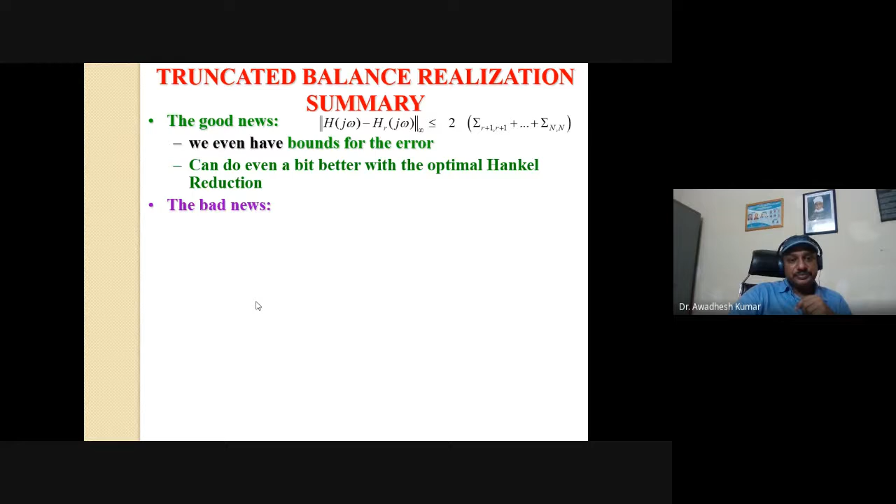But there are some demerits to it, because obtaining this observability and controllability gramians, W0 and WC, requires solving this Lyapunov equation, and this poses somewhat computational burden. And one more thing, via this method, you can test and reduce the system up to order 100 approximately. This works well.

But in one of my papers, through this method, I have gone to reduce a system of order 1006, and that worked well. But this requires a little bit of modification. You can just refer to my paper given to the class.

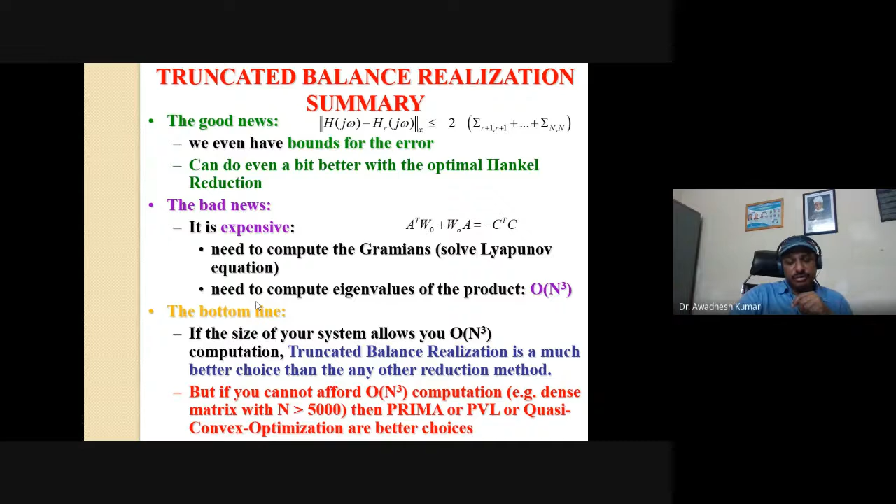In the third time domain method, going quickly, is the notion of Hankel norm approximation, where we use some kind of optimization. Here the original system is G(s) and the reduced system is G_cap(s). So we try to take the Hankel norm of the difference of G(s) and G_cap(s).

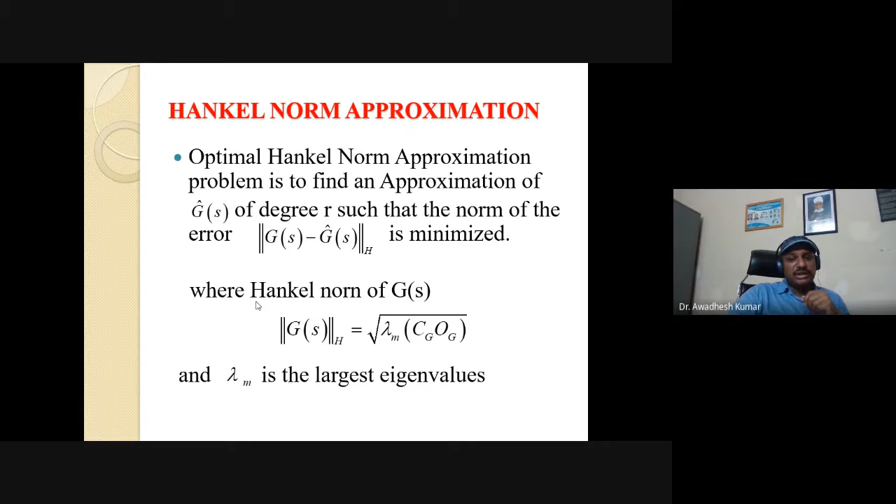And try to minimize this Hankel norm with some optimization method we can apply. There are a number of optimization methods you can use, and you can achieve this optimization. So in that way, this is known as optimal Hankel norm approximation, given by Glover. This Hankel norm you can define as the square root of the largest eigenvalue of the product of the controllability and observability gramians.

Now, this is all about your time domain method. There is another method called modal truncation, where you try to retain the dominant modes, and based on that, several algorithms have been given. So these were the time domain methods. I restricted my talk to the time domain because large scale systems can only be handled through this time domain method. Now, at the end of this talk, if we can spare a few more minutes, we can see in frequency domain one of the methods, Pade approximation.

And go very quickly. In Pade approximation, what we do is we have the frequency domain representation of the system, something with the numerator and denominator polynomial, and we try to expand this around s equal to 0. This rational function, we try to expand around s equal to 0.

So we'll get terms like t naught plus t1 s plus t2 s square and so on. These t naught, t1, t2 we call the time moments. If I expand the same transfer function around s equal to infinity, we'll have a similar expansion, m naught s to the power minus 1 plus m1 s to the power minus 2 and so on. These coefficients m0, m1, m2 we call the Markov parameters.

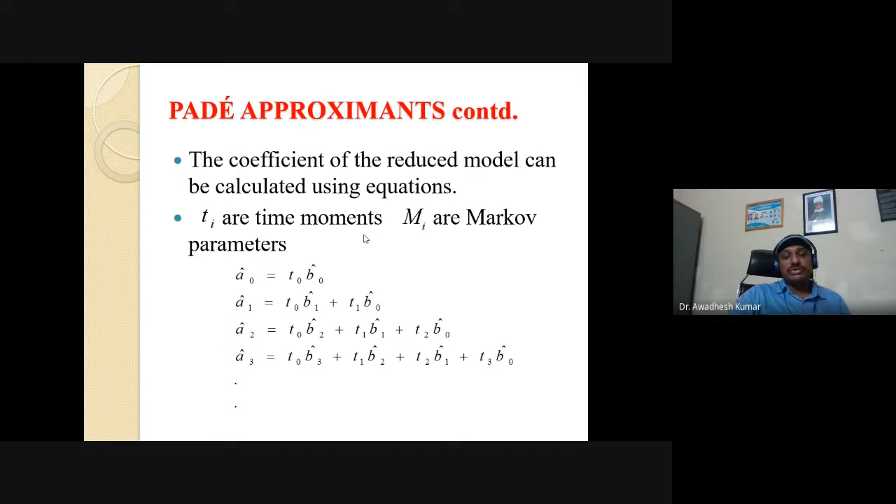Through Padé approximation you obtain both numerator and denominator, so there is a demerit to it: often for a stable system it may lead to an unstable model representation. So what you can do instead is take another method which preserves stability, obtaining the denominator via Routh and the numerator via Padé, giving another approximation called Routh-Padé. I won't talk much about it.

Since Padé approximation is equivalent in the time domain to Krylov methods, Krylov also has the demerit of producing a simpler model with unstable characteristics.

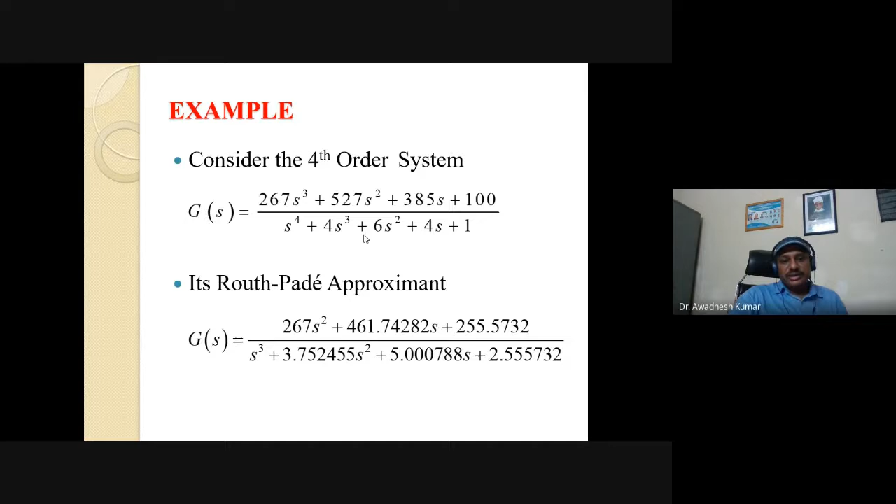Here are some examples. A fourth order system has been reduced to a third order system via Routh-Padé, and then you give a step input to it. You observe the step response of the original system and the models. Model 1, given by the red line, and the original system, given by the blue line, are quite matching, so it is a better representation than model 2, shown in green.

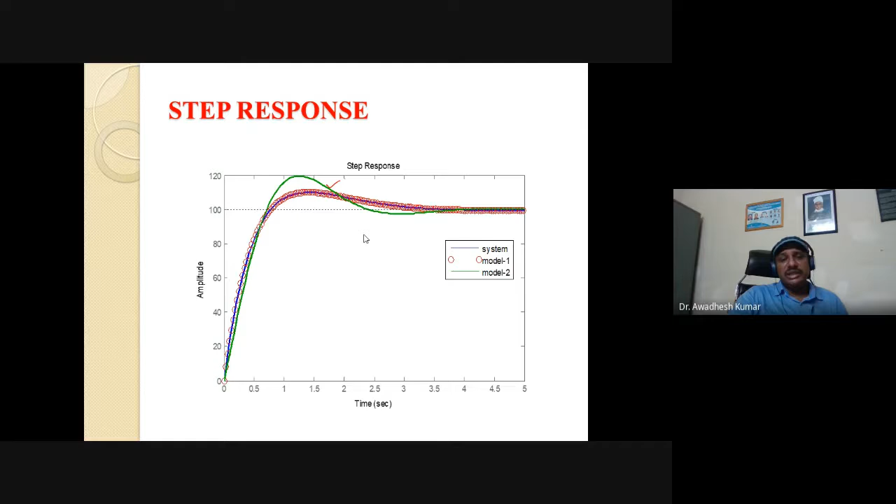There is one more notion: if the system is G of S and the response, you can think of Y(S) as G(S) into U(S), of course for a step response. In the model G cap of S, the step response would be Y cap of S, given by Y cap of S equals G cap of S into U of S.

You can frame an integral square error, which is nothing but the error squared. The error is the difference between the two responses, and integrating it gives the integral square error. We can frame an objective function based on this, the ISE, and obtain G cap of S, the reduced order system, by minimizing this ISE. Minimizing the ISE leads to the matching of Y cap to Y(S). This is optimization-based model order reduction.

In India, many researchers have worked on this, and several mixed methods have been given.

This is an 8th order system, and there you can see the poles as -1 to -8. One optimization algorithm, as given by the Luss-Jakola algorithm, is used, and a third order model is obtained.

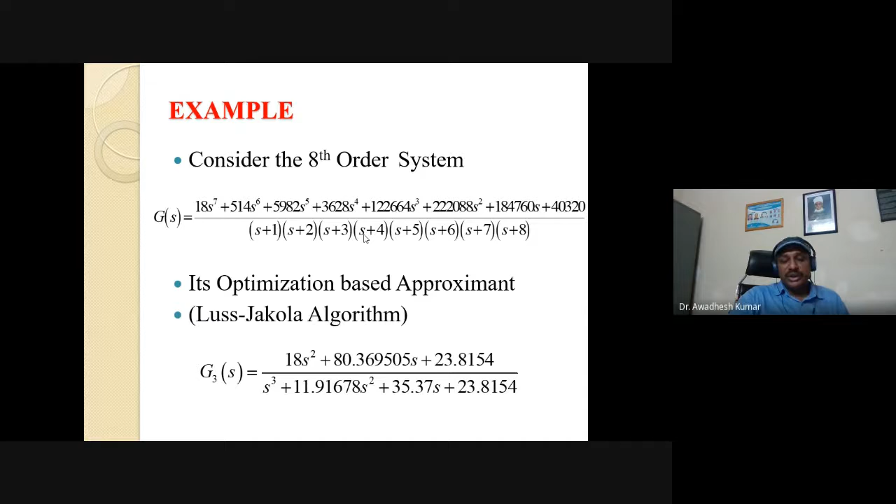So what we can say for the optimization-based model order reduction is that it is a very good tool, and several optimization tools can be applied to minimize the ISE. Instead of ISE, we can take some other notion based on the error.

So the various optimization tools are Luss-Jakola, geometric programming, genetic algorithm, PSO, differential evolution, ant colony optimization, artificial bee colony, and there are several more - more than 25 optimization techniques are there, and they are often being applied to get this reduced order model. Now let us see a few applications.

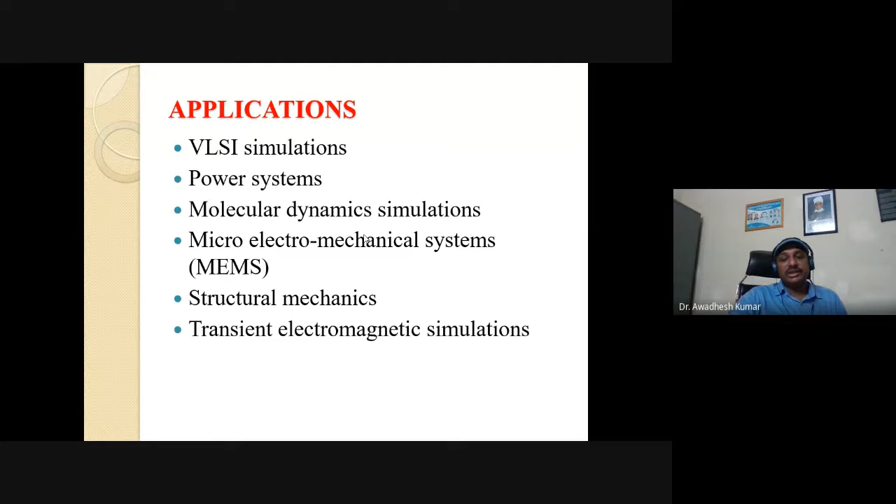So this is VLSI simulations, power system - power system modeling often leads to system representation of very high order. A few more: molecular dynamic simulation, micro electromechanical systems, structural mechanics, transient electromagnetic simulations, fluid dynamics, and optimal control of large-scale systems.

Now, I'll take 2-3 minutes more. So let us now conclude my talk with these key challenges. Out of this, what we can see, there are a few challenges to this area.

The first challenge that we see is the order of reduction. We have several methods in time domain and frequency domain, but only this Hankel singular value is the one indication that somehow gives an indication of what should be the order of reduction, but there is no other technique.

So again, the researchers are trying to cultivate the structural feature of the system itself to get this idea of order of reduction - the order to which the system must be reduced safely to represent the original system in full sense.

Now, when I was discussing this Pade approximation, and I have gone through this time moment and Markov parameter, this again gave one challenge: what should be the optimal ratio of time moment and Markov parameter matching?

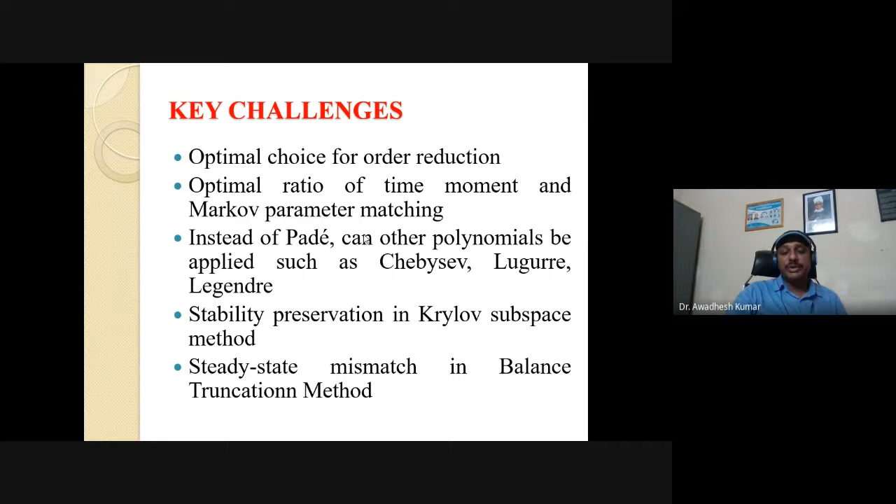So again, notions are given, like singular perturbation method, and there is frequency weighted balanced truncation, where you can match this, but that is local - you have to take a range of frequencies over which this matching will be achieved. So steady state matching is a big challenge in balanced truncation. If that could be incorporated into the balanced truncation algorithm itself, that would be a prominent work in this area. But so far, some mixed strategies have been applied to overcome this particular demerit.

Now, there is one notion coming in the literature, and that is pole dominance. What we think of as the most dominant pole is the one closer to the j-omega axis, but that is not true for all cases.

There could be other poles which are not nearer to the j-omega axis, but which may be dominant. So if we keep only the dominant poles and reduce the system, we get a lower dimensional representation via the classical notion of pole dominance. This may lead to misleading results.

So what we can do is have a newer notion where the ratio of residue to pole is taken as the new notion for pole dominance. If we go this way, a better representation will be obtained.

So now the challenge is, can this notion be incorporated in the algorithm itself? We have developed a hybridized technique where this pole dominance has been considered in balanced truncation. But if pole dominance could be incorporated within the algorithm itself, that would lead to great work.

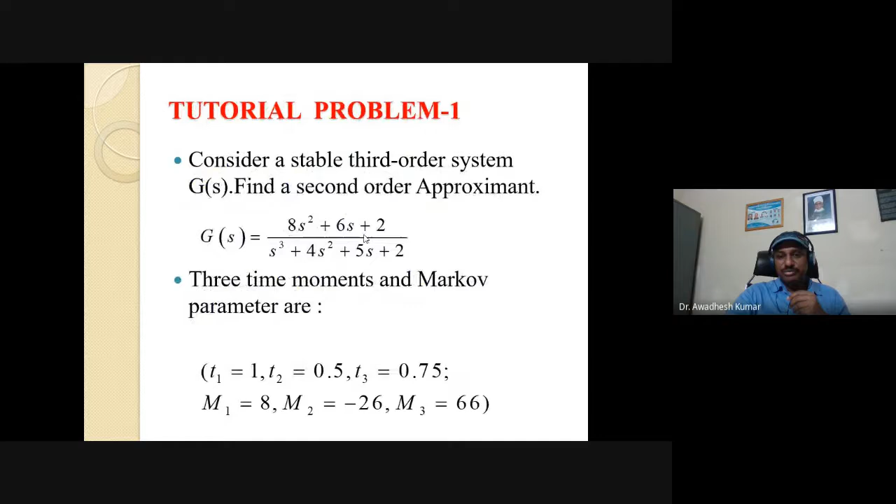So definitely participants have got something regarding model order approximation techniques, and you have given key challenges also. So those who are working in this area will define their research problems accordingly, since you have given the key challenges. Thank you, sir. Thank you very much, sir. Once again.

Thank you also, Dr. Chiranjeevi, and thank you all the participants. So should I leave now? Yes, sir. Yes, sir. Okay. Thank you, sir. Thank you so much.